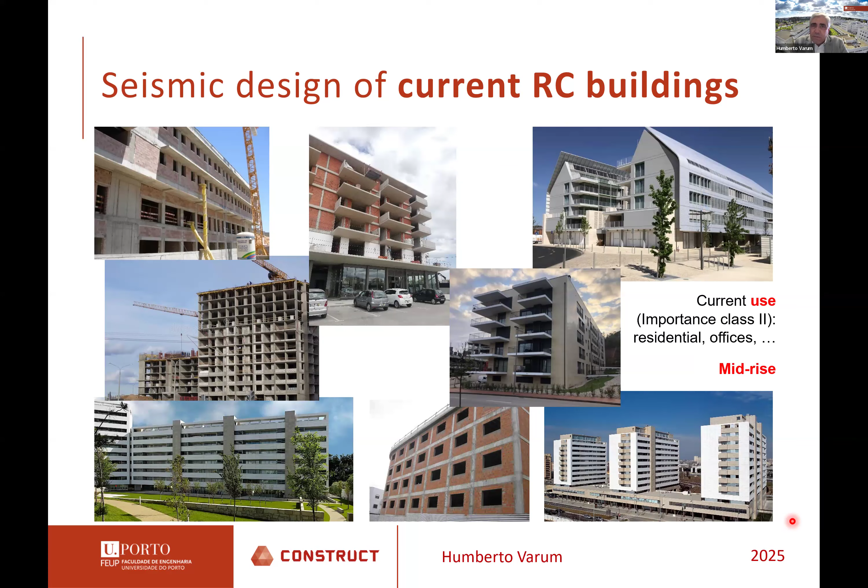It's important to highlight that during my presentation I will leave some comments, ideas, and eventually some provocations. It is essential to say that the message I would like to pass should be interpreted as applied to current buildings, buildings of current use, typically of importance class 2 according to our Eurocode 8, and also mid-rise buildings. The lessons and message I'd like to share are based and centered on this type of very common buildings.

In my lecture, apart from a brief introduction and some general comments to better frame my talk, I will give importance to three main pillars: the first is lessons learned from recent earthquakes; the second focuses on structural irregularities of buildings; and the third will discuss the importance and effect of infills on the seismic response and performance of our buildings. Depending on time, I will conclude with some final comments.

Allow me to share with you some questions that we put to ourselves in our research group, which are the basic motivation for the work we are doing in our research and technical activities.

The first provocation or question is: do you really know everything about the seismic response of these common building structures? The second question you should put to yourself every day is: do you really have regular building structures? Even if you recognize that our international and national codes have evolved a lot, are they adequate for the assessment and design of irregular building structures? And in another direction, are you really dealing well with the influence of infill masonry walls in the response and performance assessment of our buildings?

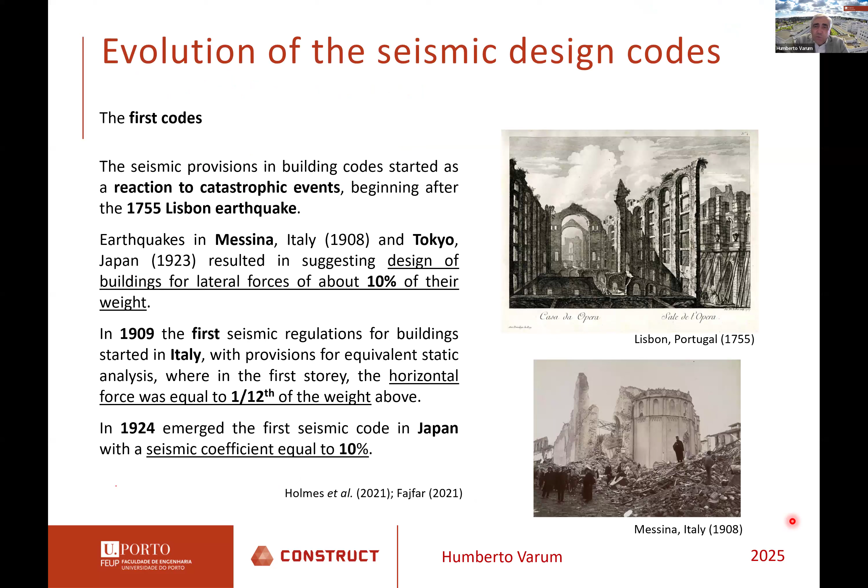Regarding the evolution of seismic design codes, we should recognize that seismic design codes are newborns. In fact, just in the first half of last century we started having some very simple documents, or at least concerns about seismic design. But it was in the second half of the last century, especially in the last decades, that we saw an important evolution of our codes worldwide. Also in this century, in the first two decades, we have seen a continuous and important evolution of our codes.

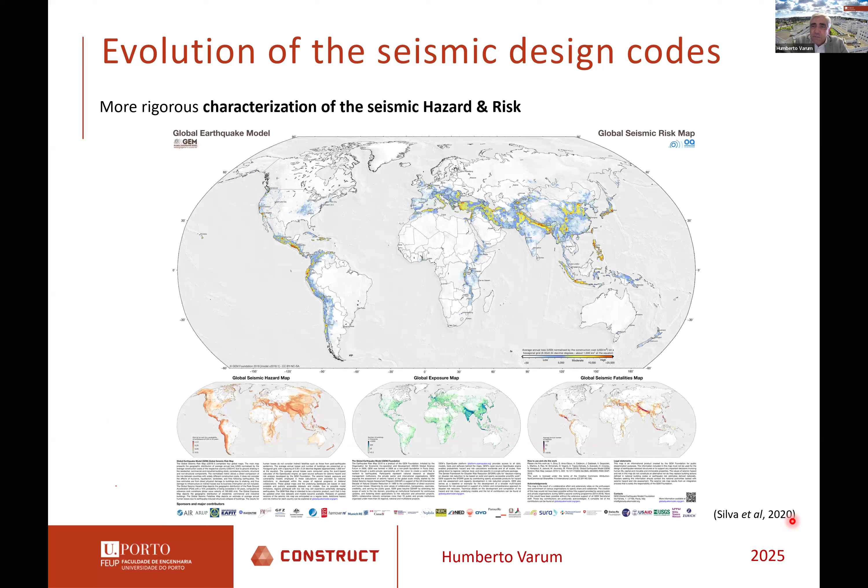In fact, we are seeing a continuous evolution of our seismic design codes all over the world due to different reasons. First, we have dense monitoring of seismic activity in the world, so with time we are knowing better and better the seismic demand.

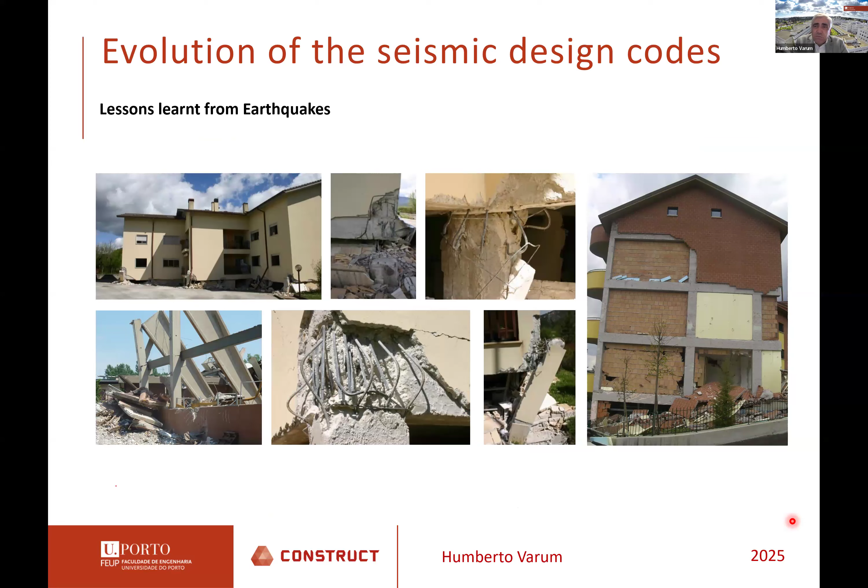In another direction, information spreads quickly and it is easy for the engineering community and the scientific community to have contact with the regions affected by earthquakes, so we are learning a lot from these earthquakes. And so those lessons end up also influencing the evolution of the codes.

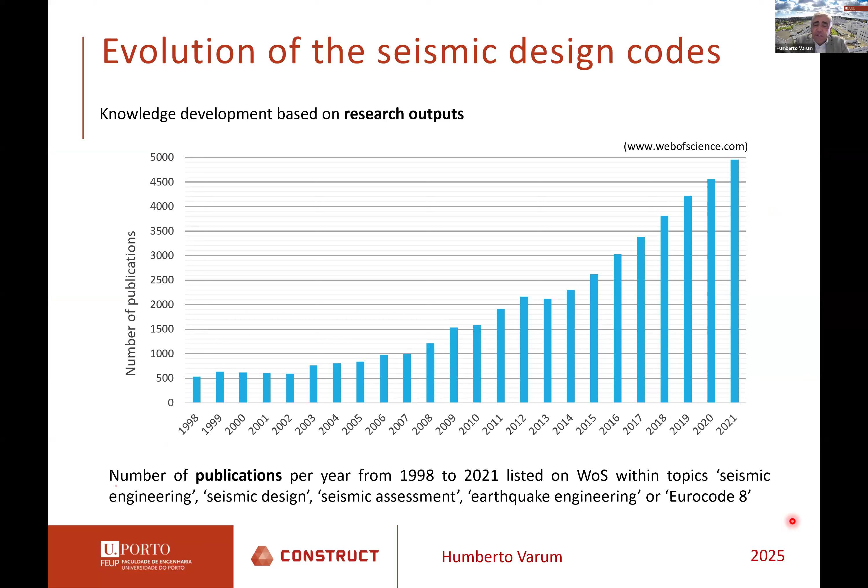In another direction, we have to recognize that all over the world our laboratories and universities are equipped with better conditions to study full-scale or large-scale structural components or even full structures. So all the investment in research creates output at the end - scientific output, papers, PhDs - but also much of this information creates knowledge that again gives us conditions to keep evolving our codes.

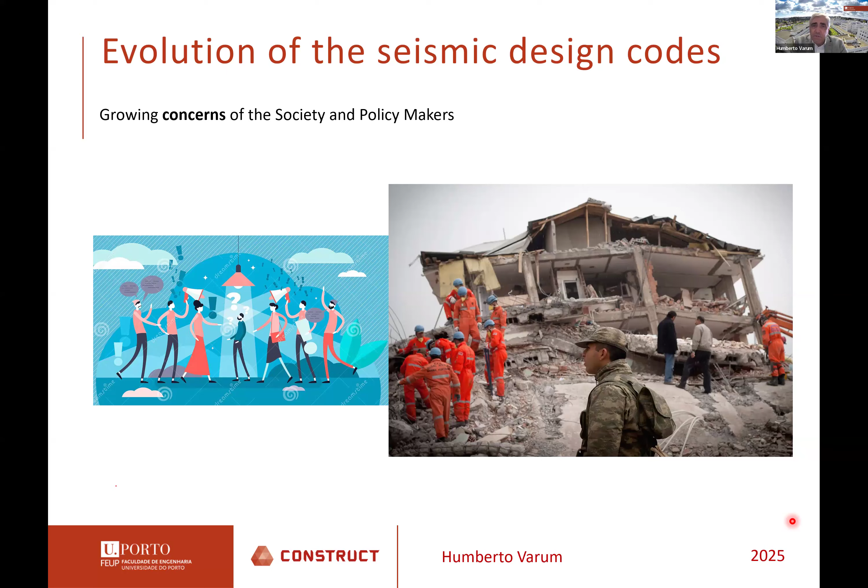And then, even recognizing that we do not live in a perfect world, there is a tendency of growing concern in our society and also among our policymakers regarding risks, in particular the seismic risk.

In fact, the dream of obtaining a set of standards to support the design of our structures started in the 70s and 80s. It was a long journey, but the first publication of the Eurocodes was concluded in 2007, and in 2008 a limited number of countries started adopting the Eurocodes.

Nowadays those Eurocodes have been adopted, and will keep being adopted, by an increasing number of countries. As is the case of Portugal, my country, which only adopted them in 2019, but we are now fully using all the Eurocodes that are published.

As you may be aware, we started a few years ago drafting a second generation of Eurocodes, and we hope that in the near future we'll have this second generation finally approved, in order to start the process of adoption by the countries using the Eurocodes.

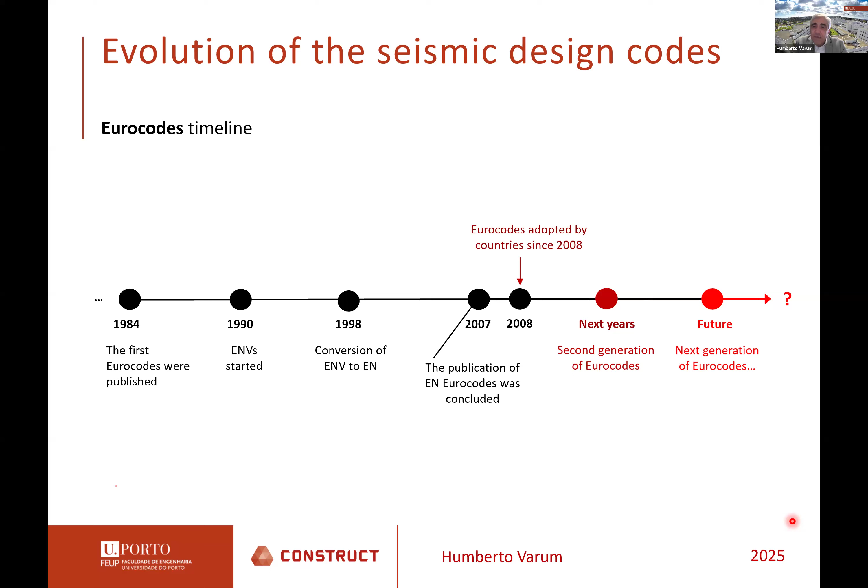And so we should continue our work, our mission, our research mission in universities and laboratories, in order to generate new knowledge that should be consolidated, simplified, and at the end of the line introduced into the next generation of Eurocodes.

From the lessons that you have learned from recent earthquakes and natural disasters, please allow me to share with you a couple of numbers and ideas.

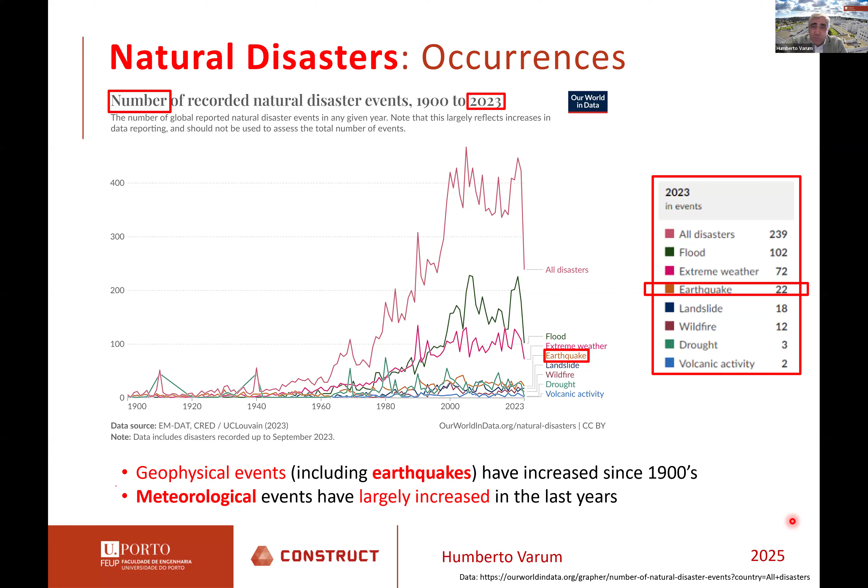According to global data regarding natural disasters with important impact on our built heritage and constructed areas, the number of disasters creating impact keeps increasing. If you share these natural disasters according to type of event, earthquakes, which belong to the group of geophysical events, are not the larger populated group. We have to recognize that meteorological events are, in terms of number, much more common.

It is important to highlight that even if earthquakes are not the more common type of natural disaster, when they occur they tend to affect larger areas, and eventually produce much larger economic impact, and are causing other effects such as mortalities and other types of impacts.

We are here among a group of experts in earthquake engineering, but please allow me to recall that the concept of risk, interpreted at the level of a single structure, a city, a region, or a country, should always be interpreted as influenced by three main vectors: hazard, vulnerability, and exposure.

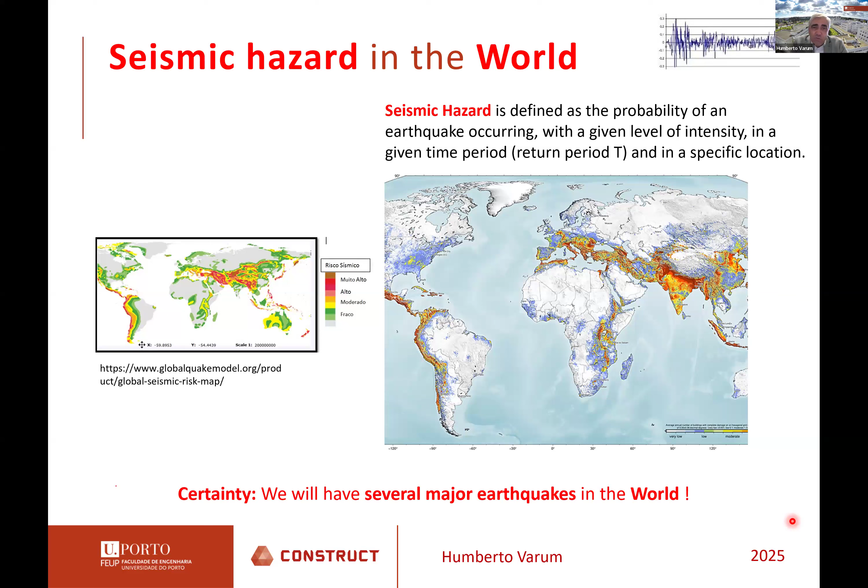Regarding the hazard, the seismic hazard we know better and better with time because we have a dense monitoring of the planet, and even though we don't know everything about it, we keep gaining knowledge and better characterizing the seismic hazard. But we do not have conditions, with the knowledge we have up to now, to predict when the next event will happen, where, when, and with which characteristics.

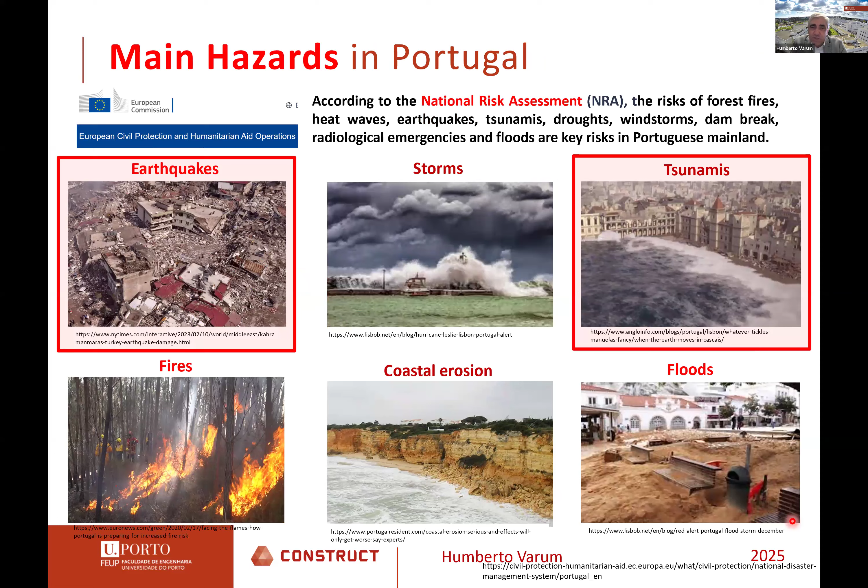For the case of Portugal, according to national and international reports, we recognize that among the main hazards that may affect our country are included earthquakes and the associated tsunamis.

Talking about seismic hazards in Portugal without making reference to the important event that happened on the 1st of November 1755 would be incomplete—it is recognized as one of the most destructive natural disasters that affected our continent. In fact, the history of Portugal changed on that tragic day.

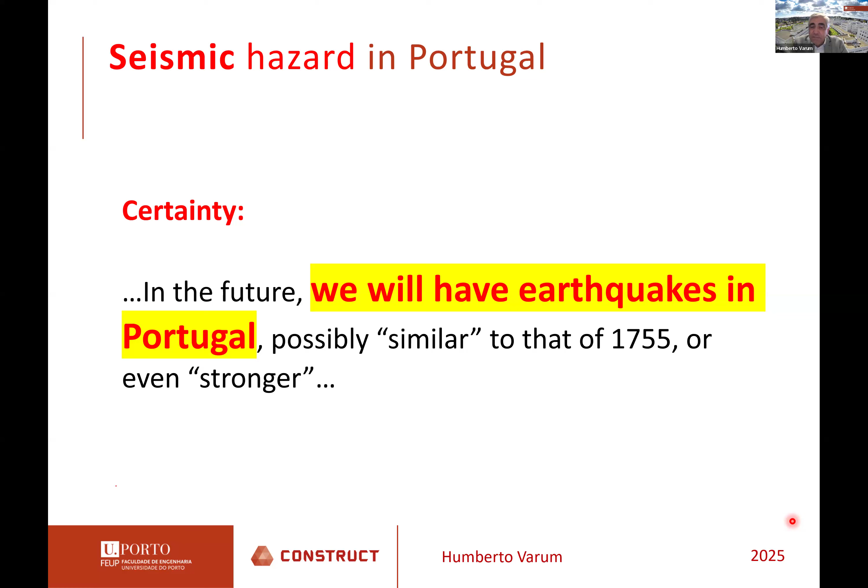Every time we witness an eventual earthquake anywhere in the world or in the country, the discussion restarts, and we are normally pushed to answer difficult questions—I mean we, as engineers and researchers working in seismic engineering. We have to recognize that we are not able to estimate or guess when the next earthquake will happen, but for sure in the future we will have one or more earthquakes of the same magnitude or even larger than the one experienced in the middle of the 18th century.

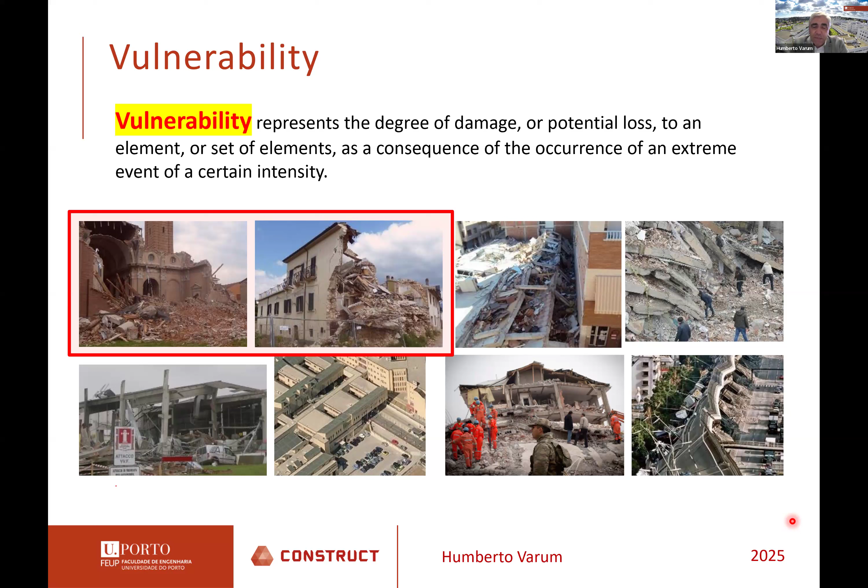The second vector of risk is the vulnerability, associated to the better or worse capacity that a building or structure has to respond to a certain level of demand. Finally, the exposure, where we try to include the value of our goods, the cultural value, the economical value, but also the number of users of our structure or buildings.

When talking about new structures, from the engineering point of view we can manage the risk considering all three main vectors. But when talking about existing buildings and consolidated cities, our capacity is limited. If you intend to reduce the risk for a certain building, structure, village, or region, we are limited essentially to managing this risk by improving—reducing—the vulnerability of our buildings.

So are you doing everything well in what regards the engineering approach, or should we keep and eventually increase our attention to the concerns related with seismic safety? Eventually the response is evident.

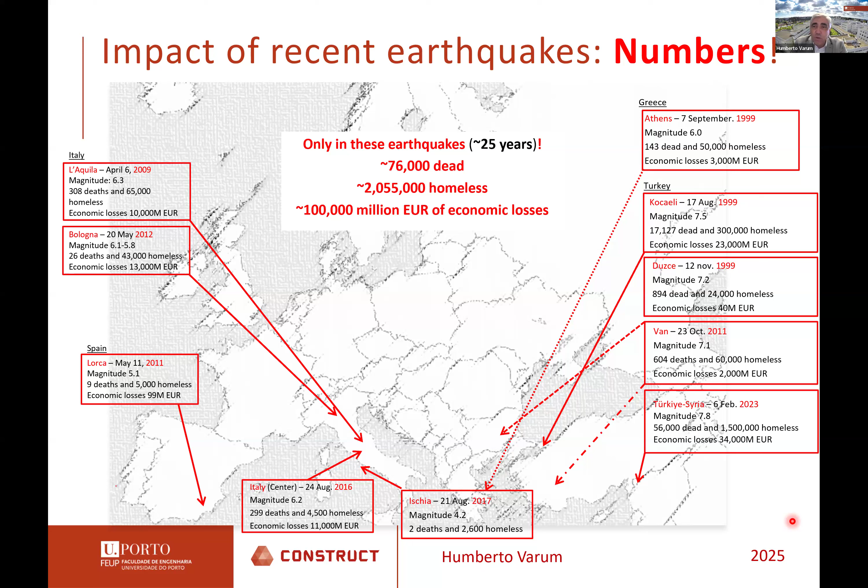In fact, we should, as society, keep the attention, keep the pressure in order to put more on the table the discussion on the seismic safety of our communities, of our cities, of our buildings, of our regions and countries, in order to somehow reduce the tendency of those numbers to keep increasing in the future.

Talking about reinforced concrete buildings and the common causes of damage and eventual collapse, I should say that all the lessons that you learn when you visit a region affected by earthquakes, all that you learn when you read a report from a site visit, tends to give us the common damage that are normally the same.

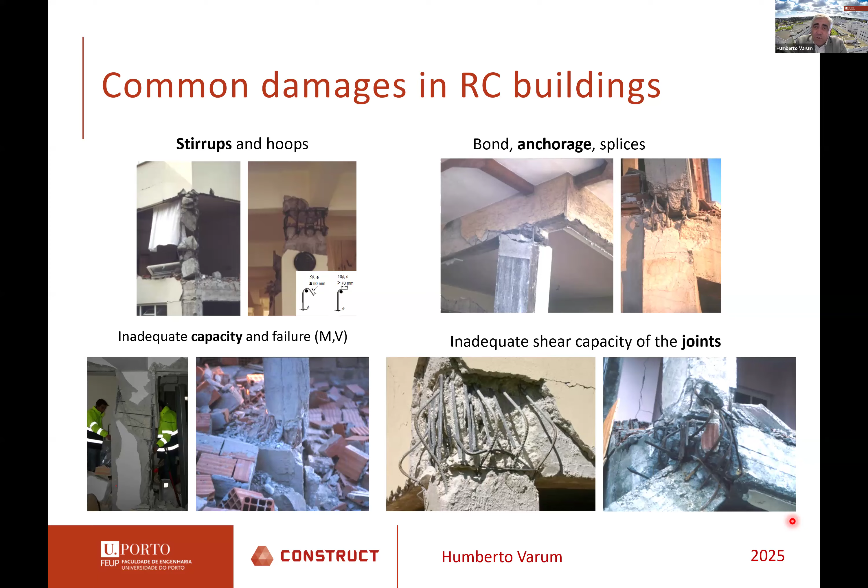The joints are a key point. We should say that it's not enough to design and detail properly our main elements, beam, columns, and walls, if you don't take the proper care on the connections. Otherwise, you'll not be able to explore the capacity of the main elements of our structure.

Of course, we do know that our structures, eventually our more flexible structures, may experience a poor behavior mechanism controlled by a strong beam weak column mechanism. This is very problematic, especially in older structures. The short column mechanism is also a very typical mechanism that you observe in many buildings.

Then the irregularities, both in plan and in elevation - we'll have time to discuss this in more detail. And then the interaction and pounding, when we are talking about building structures located in urban areas - the interaction among neighbor buildings could eventually, in some cases, protect the buildings, and in other cases, anticipate the damage and collapse.

But allow me, please, very simply, to highlight here two main ideas that are extracted from what we keep learning every time that you see regions affected by earthquakes.

Since an important part of the buildings that you have nowadays in our cities were already designed and built following the actual modern codes and eventually the better and more rigorous construction practice, we should say that our modern buildings tend to behave much better, as you expect. The main concern, or one of the major concerns regarding the seismic vulnerability of our buildings, is centered

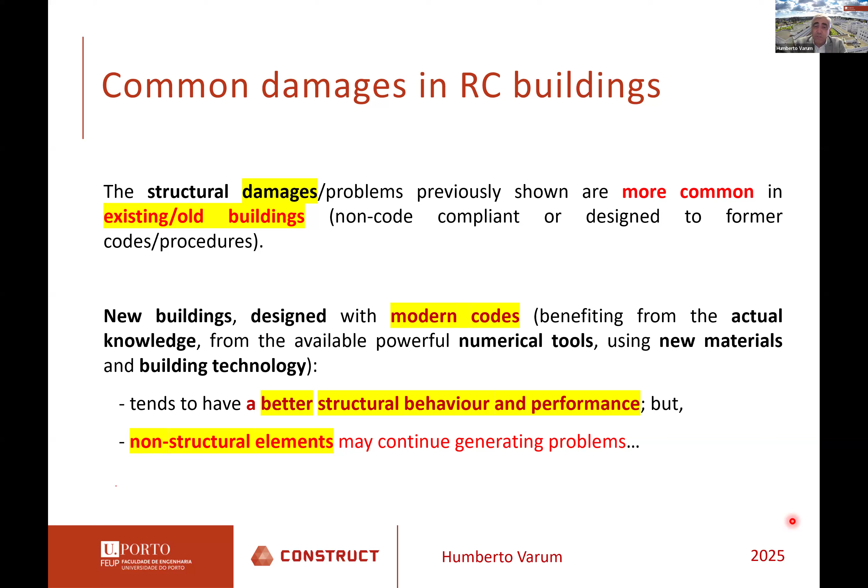We have also to say that from what we have learned and what we keep seeing every time that you visit a region affected by earthquakes, is that the non-structural elements, eventually such as the infills or facade elements, may conditionate the behavior and the response of our buildings. Eventually, they can introduce new fragilities in our buildings.

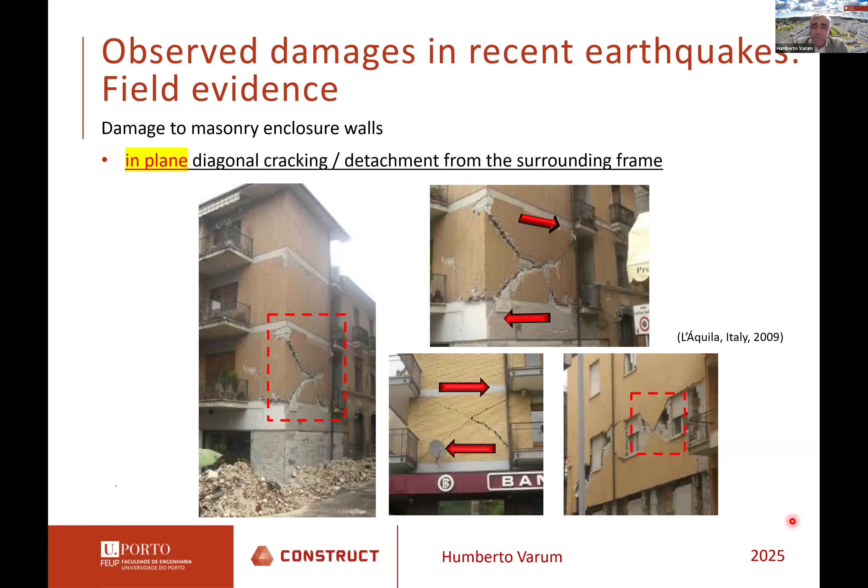This is something that you keep seeing, for example, in this case in Aquila, but among many other examples of regions affected by earthquakes, you see typically that, in fact, our masonry elements, both as interior elements, but also as facade elements, may be very strong, but those elements are fragile for loading, for when they are loaded in plane.

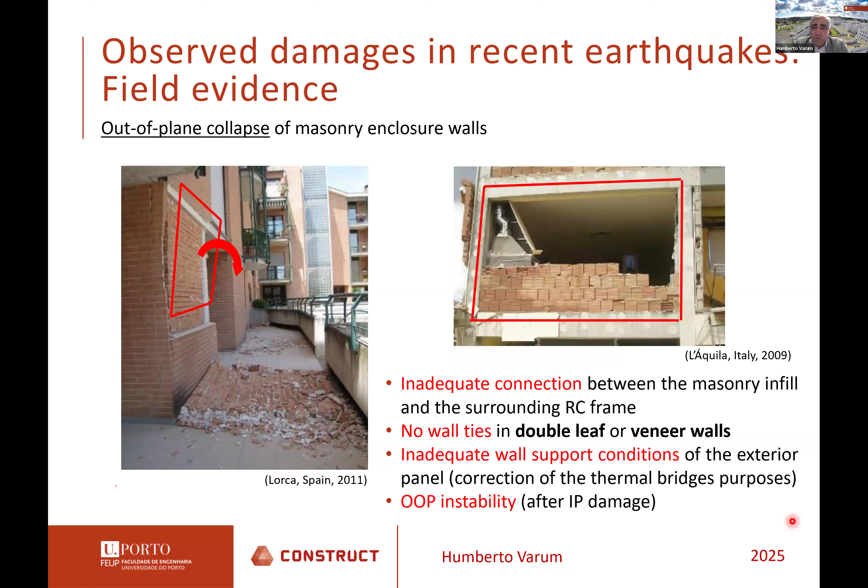But what has really been a big surprise, in particular in these recent earthquakes, for us, for me at least, is the number and the extension of collapses of the elements of the facade for actions out of plane, due to the well-known causes such as elements with improper connection to the structure, elements excessively slender, with poor support conditions, with no ties.

This is a picture that I normally like to comment on, because it corresponds to a scenario that you have seen in many places recently, but also here in this case in Aquila, in which we have seen current buildings with moderate to practically no damage in the structural system, but with extensive damage and collapse of the non-structural elements, particularly in the facade.

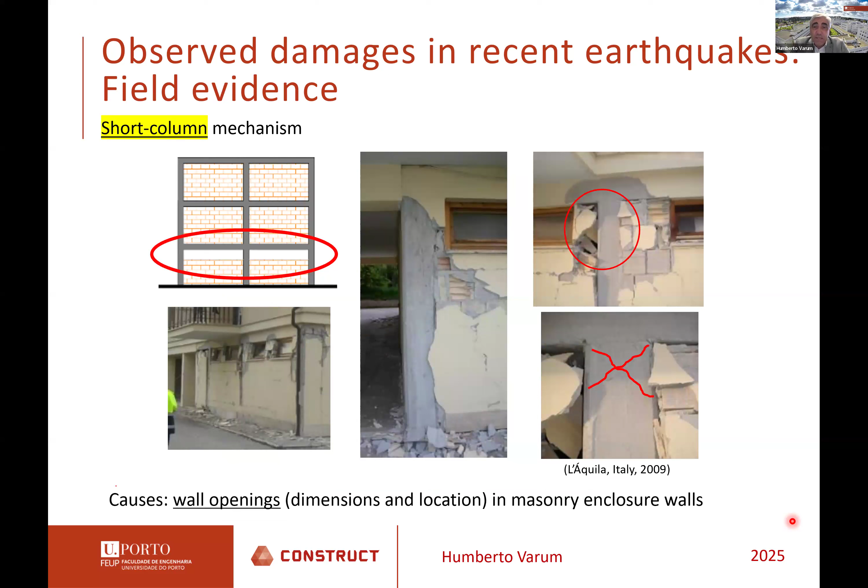This calls our attention to the fact that we should eventually in the future put more attention to studying these elements and their response under earthquake demands, and eventually their influence on the structural response.

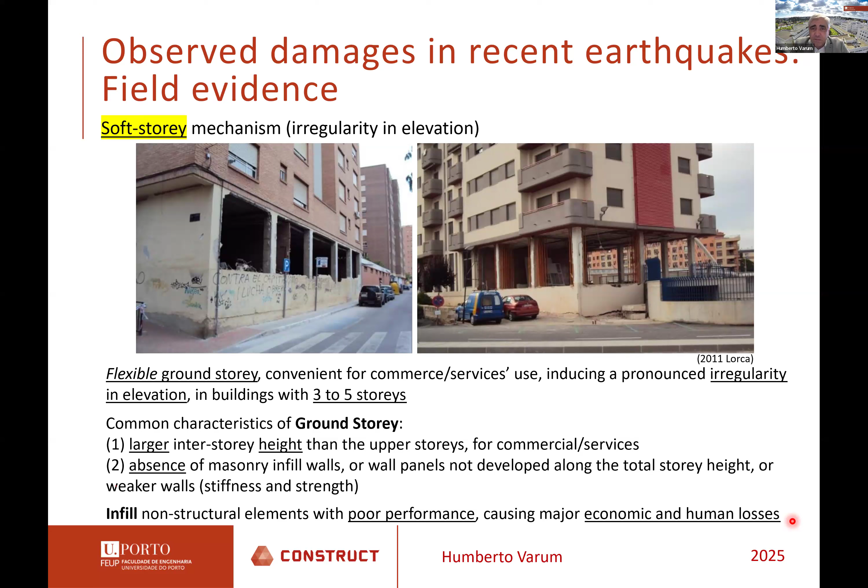The short column mechanism is well known and very common, caused by irregularities induced by a non-uniform distribution of infill masonry walls, both in plan and in elevation. In the case of Lorca, the earthquake that affected the south of Spain, you have seen many buildings with this poor seismic response.

We should highlight that even though we are using more detailed and rigorous models to simulate the behavior of our building structures, the more or less uniform distribution of non-structural elements may at the end affect the seismic response, dramatically changing the distribution of demands in terms of internal forces and deformations.

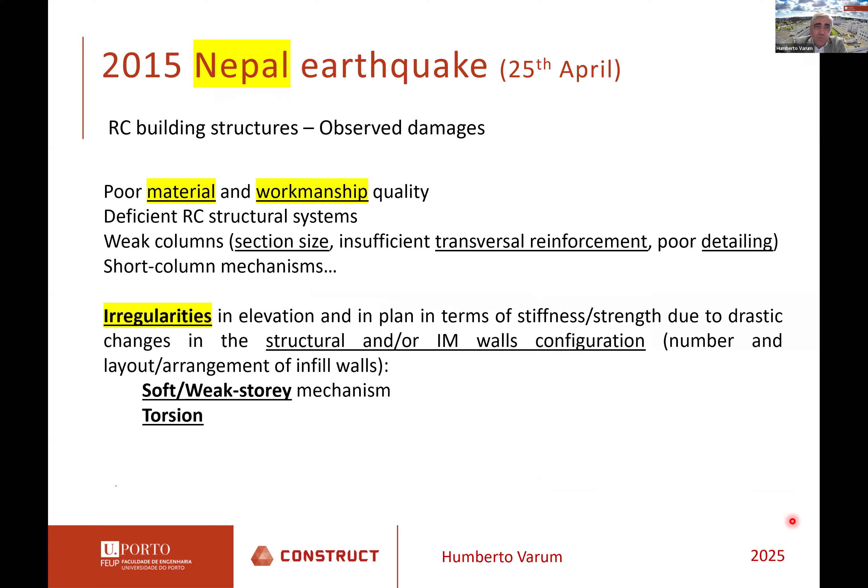Please allow me now to jump to Nepal. We had the chance to study the impact of this quite recent earthquake 10 years ago, and among the large number of buildings affected and collapsed, the reasons behind this poor behavior are well known: poor material, workmanship, and irregularities were present in many of the collapsed buildings.

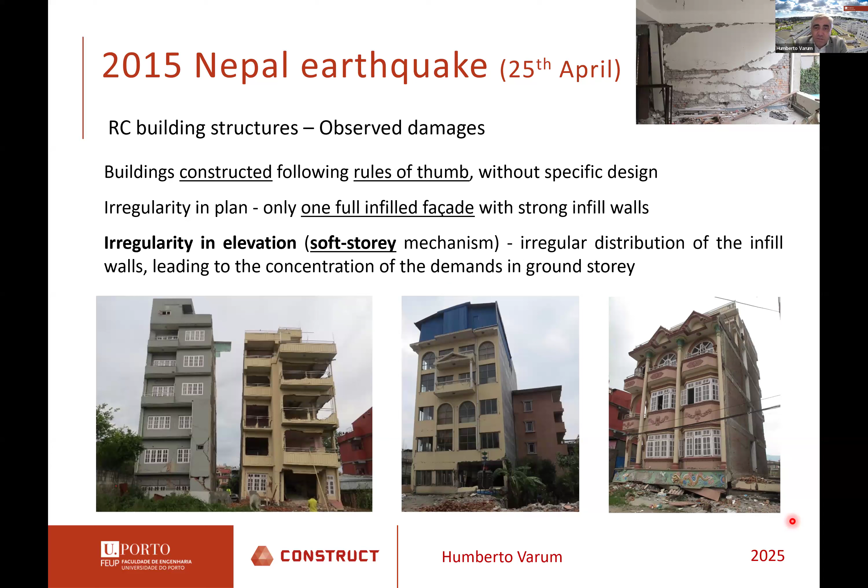Starting with the current buildings constructed without formal design, eventually following established rules of thumb but with some changes and adaptations, with increased number of stories and a non-regular distribution of infills in plan and elevation, this may condition the behavior and performance of those buildings, as was observed.

We also had the chance to visit some buildings formally designed following codes adopted in the region. For Nepal, the Indian code is largely used in design. Even when a building was properly designed, the structural system combined with the distribution of infill masonry walls ended up introducing a response controlled globally by torsion, with extensive damage that conditions the use of the building after the earthquake.

In 2017, we had the chance to study the impact of the earthquake that affected the central region of Mexico, analyzing buildings affected with collapses or extensive damage. The same reasons behind this poor behavior: material properties, detailing, and other well-known mechanisms.

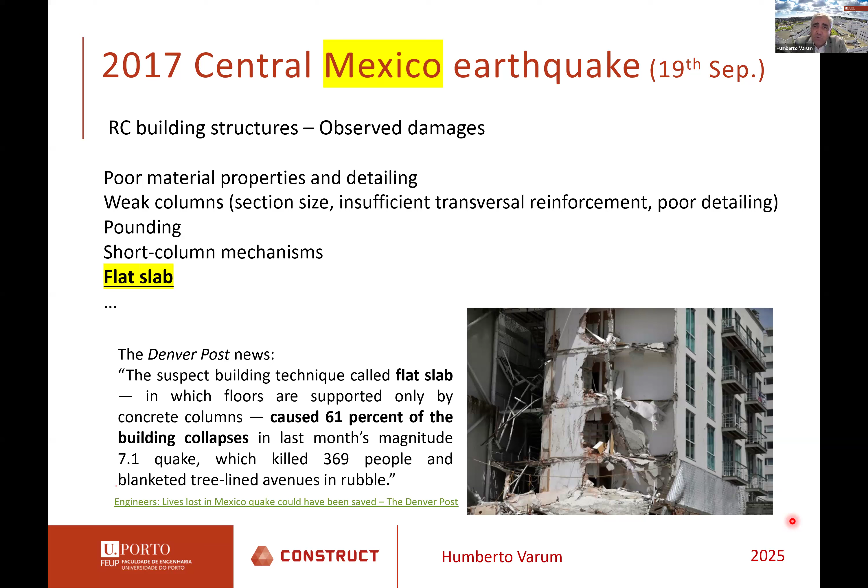An important number of the buildings that collapsed corresponded to flat slab systems. I don't want to say the problem is the flat slab itself, even though there are other issues affecting it, but we should give more attention to the design and detailing of buildings with this type of structural element.

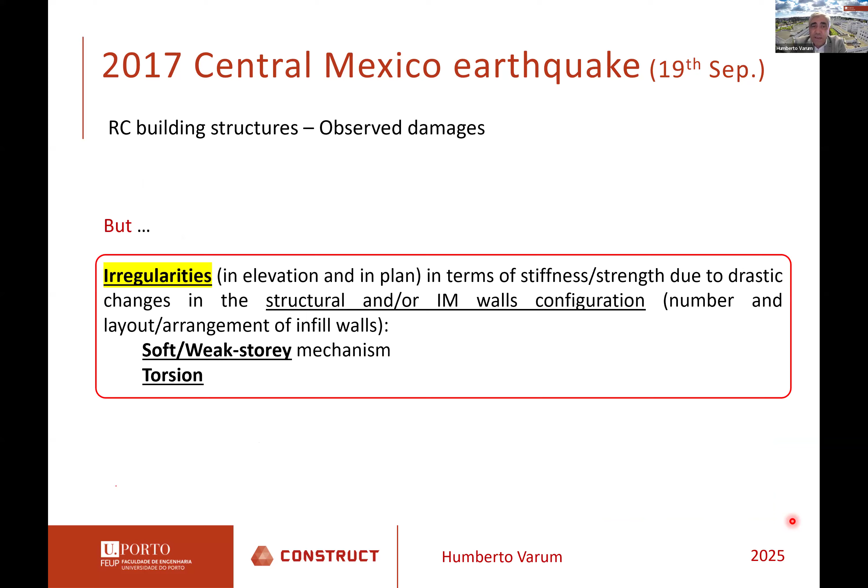Among the causes of the extensive damage observed in Mexico, irregularities were again one of the main problems. Particularly in corner buildings, even very current buildings where the structure was a regular system both in plan and elevation.

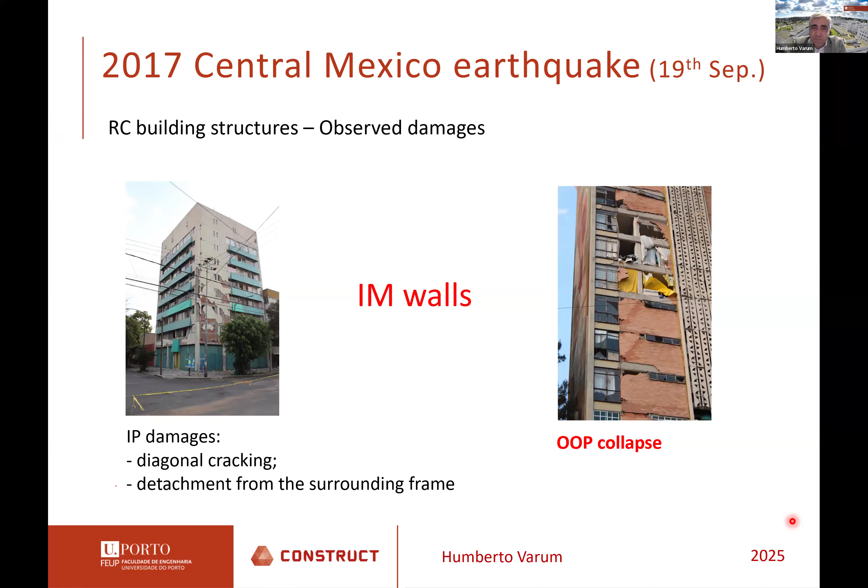Another aspect I would like to highlight is that all elements that are slender, irregular, and poorly connected, meaning non-structural elements not properly attached to the structure, end up performing poorly. This is the type of out-of-plane damage we have seen extensively in many buildings.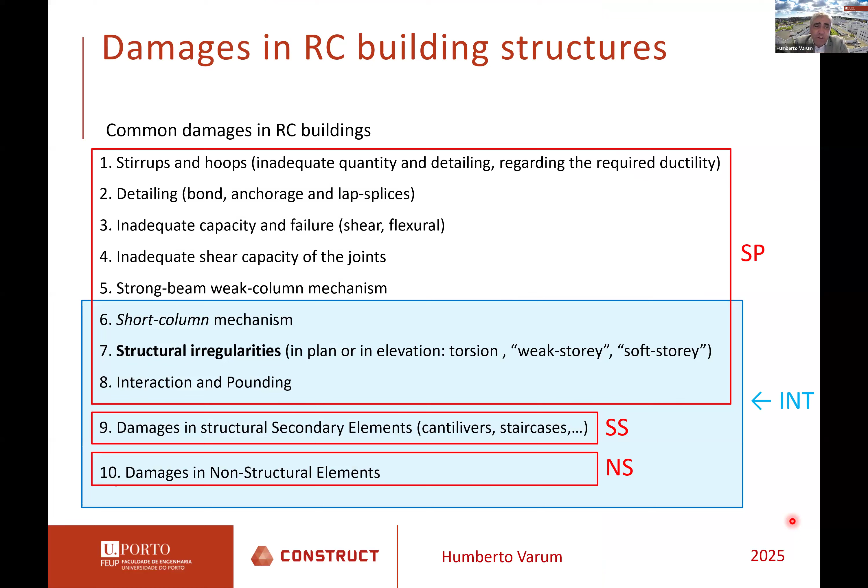From what I have said, I would like to point out that even though the typical causes of damage or poor behavior are well established and well known, in many situations the poor behavior of our buildings ends up being driven by the influence of infill masonry walls.

We should keep our attention, interest, and research in this line in order to better understand and characterize the seismic response of complex systems like buildings, considering the influence of infill masonry walls. The infill masonry walls may significantly affect the response of the building structure and its performance, but also the seismic response of the main structural system may end up changing the support and stability conditions of the non-structural elements.

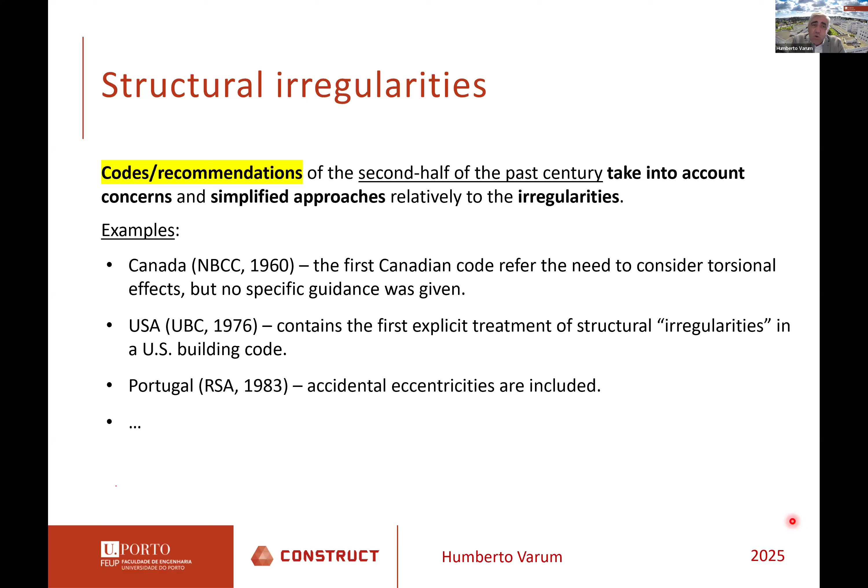Regarding irregularities in the structural system, this is a problem that was recognized early. In fact, the first codes, even if simple, all over the world included at least one recommendation or indication that the problem should be attended from the very beginning stage of the design procedure.

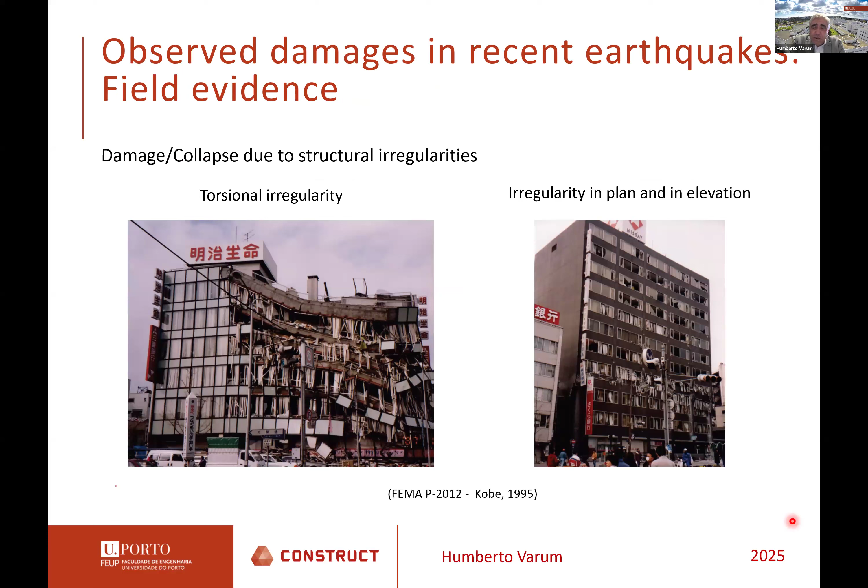But even though it is recognized from the first version of our codes, we keep seeing when analyzing earthquakes or regions affected by earthquakes, such as Kobe or Mexico, that it keeps being one of the main reasons for poor performance of our buildings.

In Mexico, already in the year 1985, a strong earthquake produced a large number of building collapses, and one of the main reasons for poor behavior of those buildings was associated with irregularities both in plan and in elevation.

Recently in 2017, again the same problem. So we do have concern about this problem, we do know the problem, but eventually the tools being used for design and detailing, and the type of pressures received in the conception, design, and detailing of our buildings, are not taking good care of this problem.

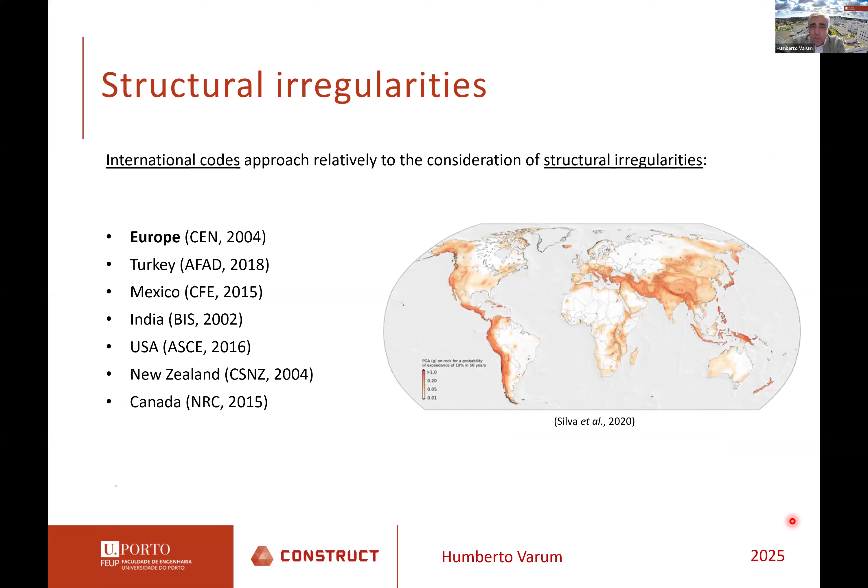We did in our research group a comparative analysis of some of the design codes for earthquake demands in different parts of the world, and so we compared the criteria that those codes impose in the evaluation of irregularities both in plan and in elevation.

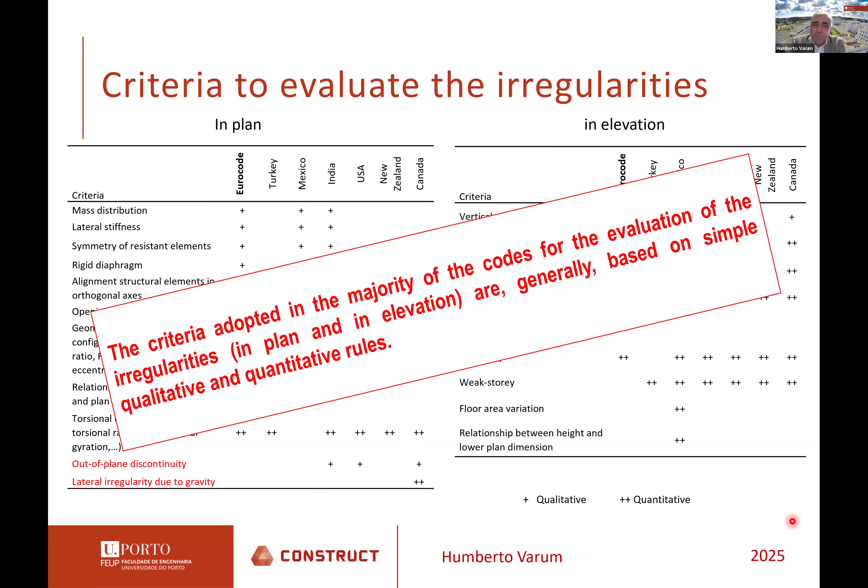Very briefly, I would like to highlight that in the majority of the codes, the criteria presented for the evaluation of irregularity are typically based on qualitative or very simple quantitative rules.

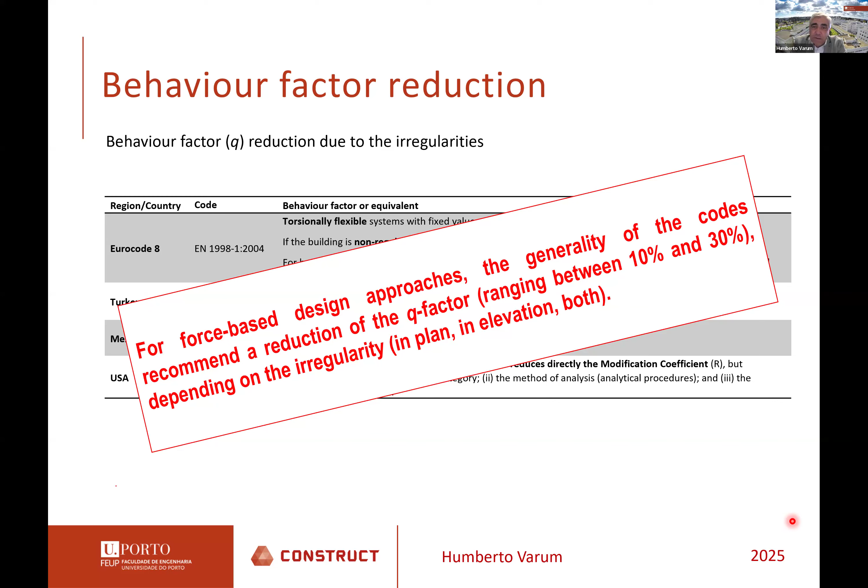For the codes we analyzed, when a structure is classified as irregular, the code itself restricts the models and methods allowed in design. For force-based design, the codes we studied generally reduce the behavior factor allowed, ranging between 10 and 30%, depending on the type of irregularity in plan, elevation, or both.

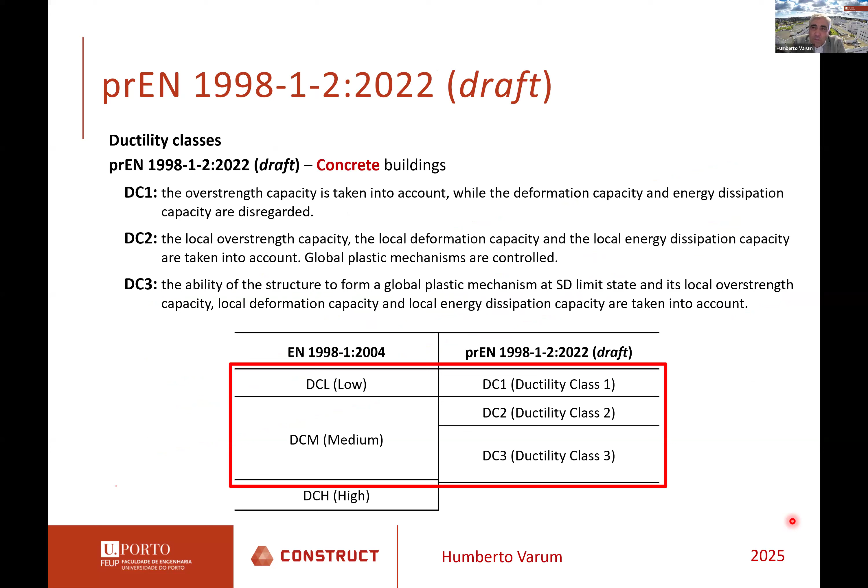As you know, in this recent revision of Eurocode 8, the ductility class was revised. For the case of concrete buildings, the ductility class high was eliminated, and an intermediate ductility class was introduced between the actual ductility class medium and low.

In this revision, concerns on torsionally flexible systems were kept, the concept of behavior factor was kept, but it was rewritten, making explicit the contribution to this behavior factor from the capacity of redistribution of the structure, the overstrength, and finally the deformation capacity and energy dissipation capacity.

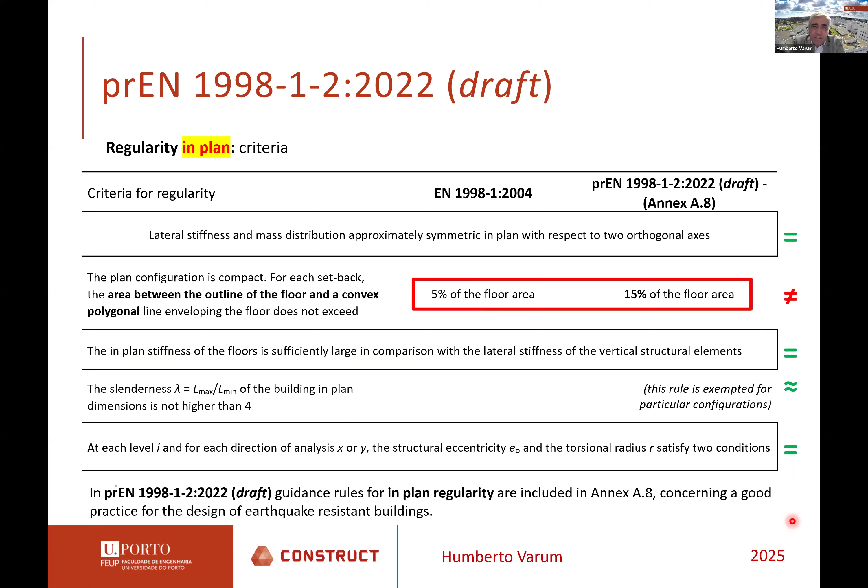Regarding the criteria for evaluation of regularity in plan, more generally the criteria were kept, but regarding the criteria for evaluation of regularity in elevation, some of the rules were adapted, passing from qualitative to simple quantitative rules in order to better quantify the level of irregularity.

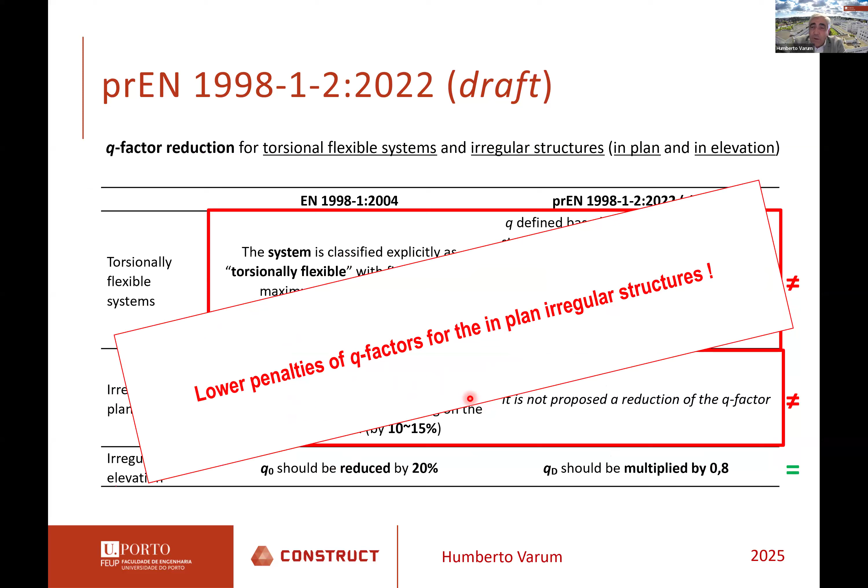Regarding those new rules, the penalties associated with the behavior factor were slightly reduced for the case of structures irregular in plan.

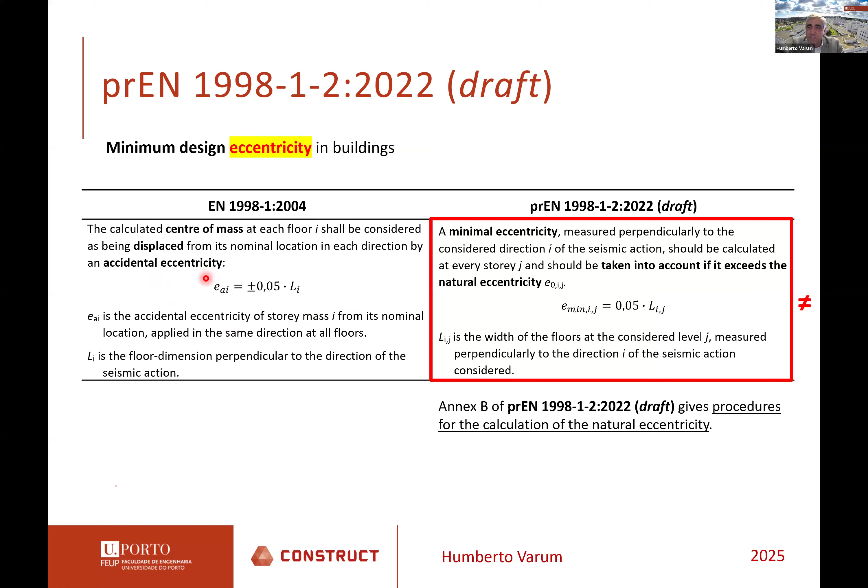The concept of accidental eccentricity is kept, but instead of being an additional eccentricity, in this new version it is considered as a minimum eccentricity.

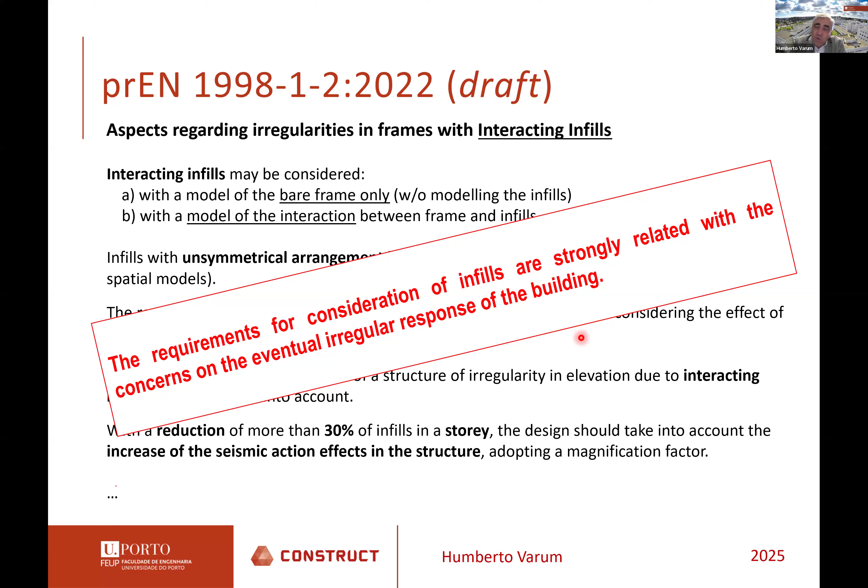In this new draft, which is in its final stage of discussion and preparation for final vote, the attention given to the effect of infill masonry walls in the response of buildings is intensified. New requirements are introduced for the consideration of infills, and those new requirements are strongly related to concerns about an eventual irregular response of buildings induced by those infill masonry walls.

I would like to share with you some case studies corresponding to buildings recently designed in Portugal, in different parts of the country. We selected for this study buildings without a very irregular shape, buildings with quite regular structural systems. Those 8 buildings were designed between 2018 and 2020, corresponding to buildings with 8 to 12 stories.

Only 2 of those buildings have constant story height along the building. The majority of them has pronounced important change in terms of story height in the first stories.

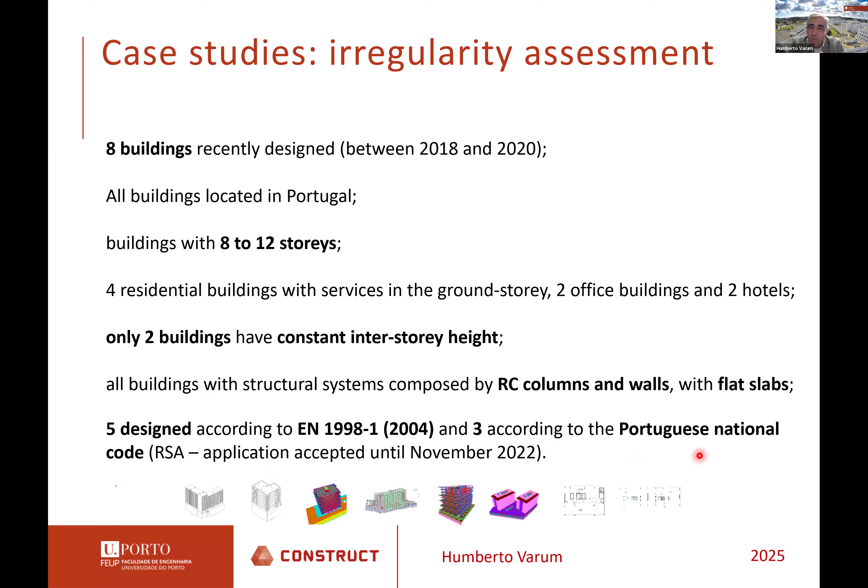All the buildings were designed and constructed with flat slabs and have vertical elements reinforced with concrete walls, with some columns. 5 of those 8 buildings were designed according to Eurocode 8, but 3 of them were designed according to our former national code. Classifying those building structural systems according to Eurocode 8, all of them were classified as wall systems with a relative ratio between frame and total lateral stiffness less than 6%. 7 out of the 8 structures were classified as torsionally flexible.

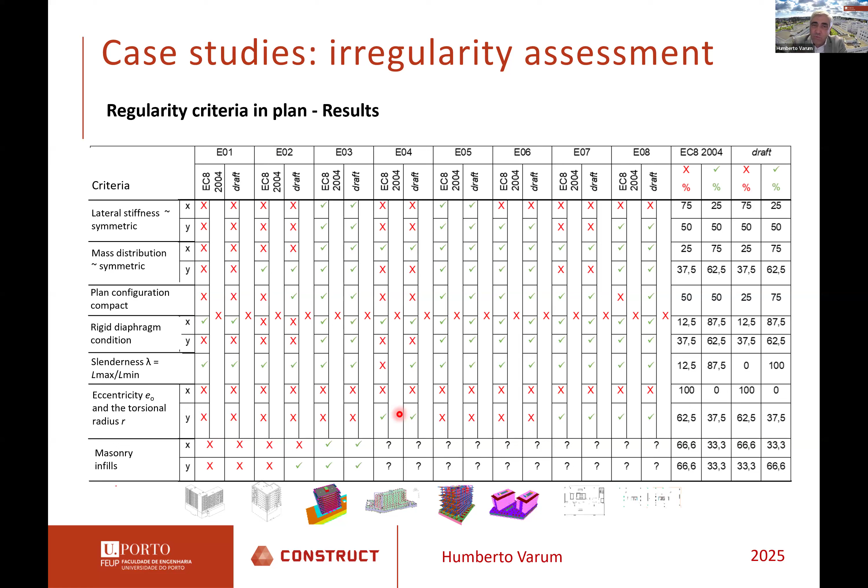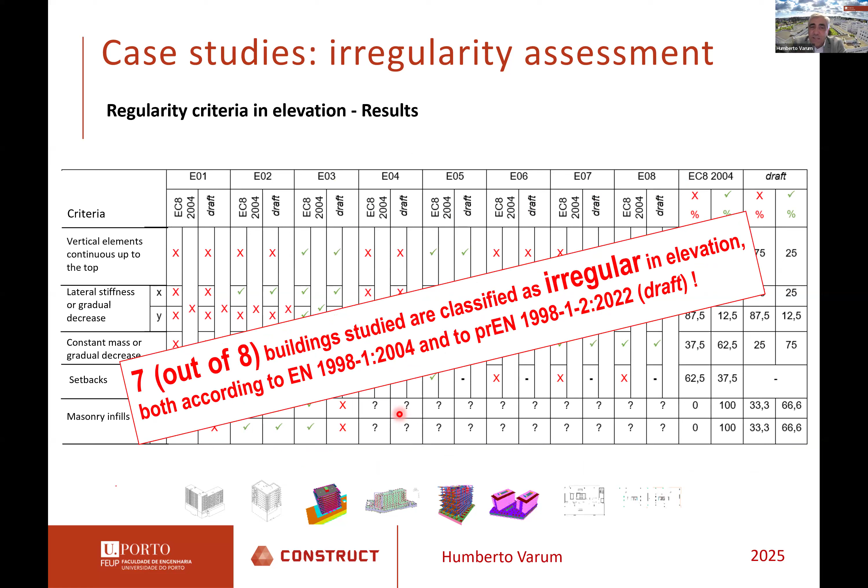Classifying those 8 buildings in terms of regularity in plan, following the current version of Eurocode 8 and the second generation, all of them were classified as irregular in plan for both directions, according to both documents. In what regards irregularity or regularity in elevation, 7 out of them were classified as irregular.

In fact, those 8 buildings, selected with some criteria to be more regular in terms of geometry, end up with the results that I just shared with you.

This allows us to put a couple of questions. First, are regular structures really common? Eventually not. Regular structures are very nicely presented in our textbooks, but in reality you will not find regular structures according to the concepts adopted in our code.

This allows us to put another question: should we really keep in future versions of the codes worldwide the classification of regularity as a binary classification, or should we eventually introduce at least one additional irregularity level? This is a comment that should motivate some research lines in the future.

Also, consider the importance that the regular or irregular response may have in the performance of our buildings. We should put to ourselves the following question: should we really keep this approach with the level of rigor that we are adopting in our codes, or should we eventually densify the criteria and introduce new criteria from a more rigorous point of view, that allows us to better classify this important parameter.

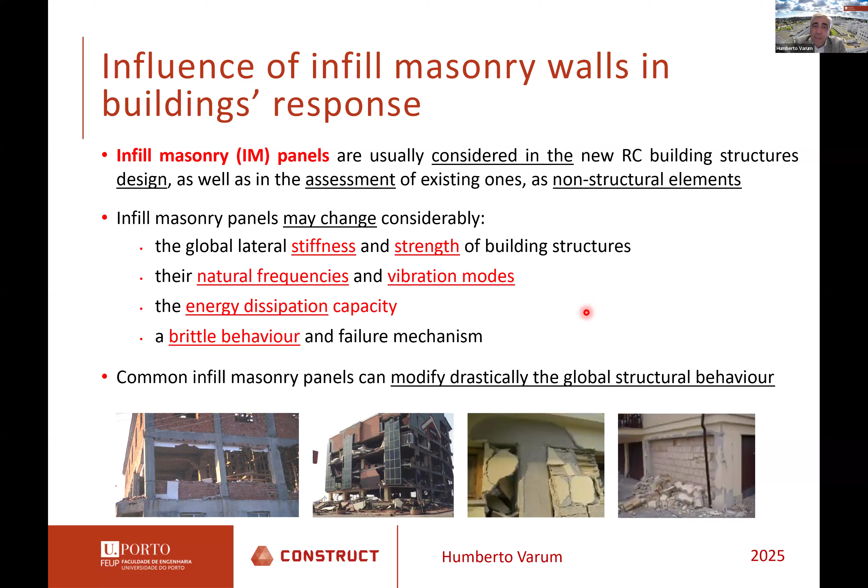In what regards the influence of infill on the response of our buildings, just to highlight what we already know: even with light infills, those infills may affect lateral stiffness and strength, may change natural frequencies and vibration modes of our buildings, may affect the energy dissipation capacity of our buildings, and not less important, may induce eventually a brittle behavior of part or the overall structure.

Allow me to comment briefly on the main outputs of one topic under a European project run a few years ago, called ICONS, developed in the ELSA laboratory of the JRC Center. Under this ICONS project, two similar planar frames were tested for lateral loads, tested with a pseudodynamic methodology. Those frames were designed and built following the current practice of the 70s and 80s in the Southern European region.

The building structure was designed only for vertical loads plus wind, and then it was assessed for earthquake demands with increasing magnitude of the ground motion, artificially generated and input to the structure using this pseudodynamic strategy. So the two similar structures, one was tested without infills and the other with infills, using this type of light ceramic clay brick with more than 60% voids, with the distribution you can see here in the image on the right.

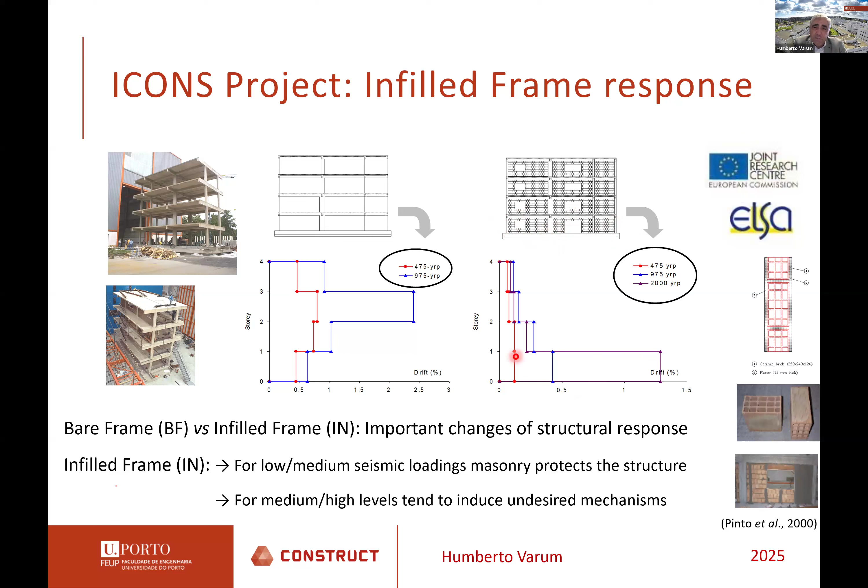For the structure with infills, in fact, that irregularity at the first story was completely hidden. The infill masonry wall somehow tends to protect the structure for the first levels of seismic demand, but when the infill masonry walls collapse in a fragile manner at the first story, it ends up creating or inducing a soft story at this level, with very limited interstory drift demands in the upper stories.

As numerical case studies, I would like to share with you 3 buildings that we have densely studied in Portugal, 2 of them located in the north of Portugal, here in Porto, and the third one located in Lisbon. Those buildings were designed and constructed in the 1950s.

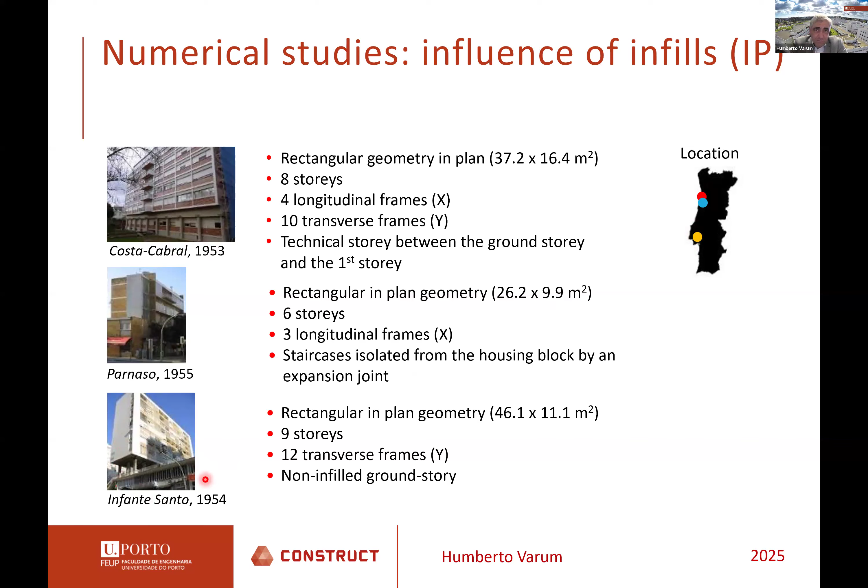Those two buildings located in Porto, which corresponds to a region with low seismicity, per coincidence have a more regular distribution of infills in height than this third case study located in Lisbon, with this pronounced irregularity in height due to the existence of a floor at the base without infills.

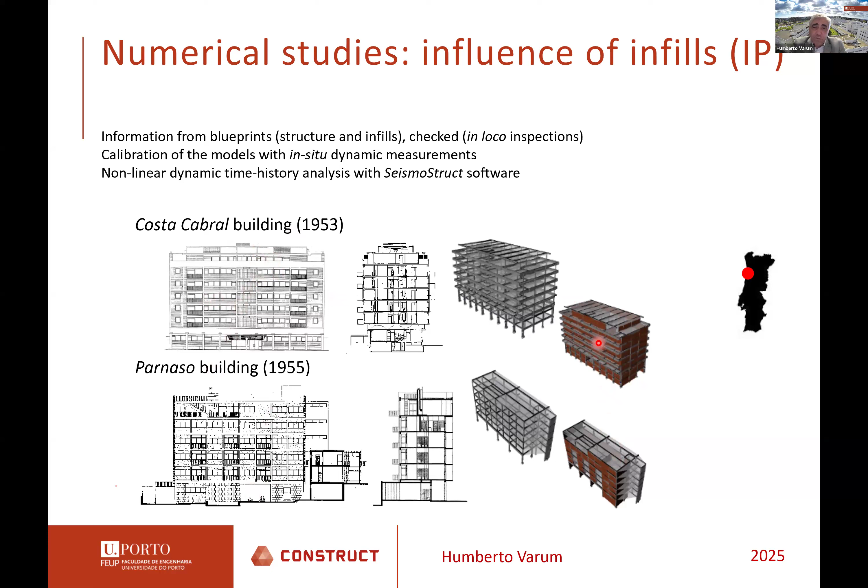So as strategy, those buildings were studied with analysis of the blueprints available, with all the details confronted with reality in the buildings. Then we have measured natural frequencies and modes, and finally we had calibrated our models of the buildings with infills. With the models calibrated, we have been playing, activating and deactivating the infills, analyzing their influence in the response.

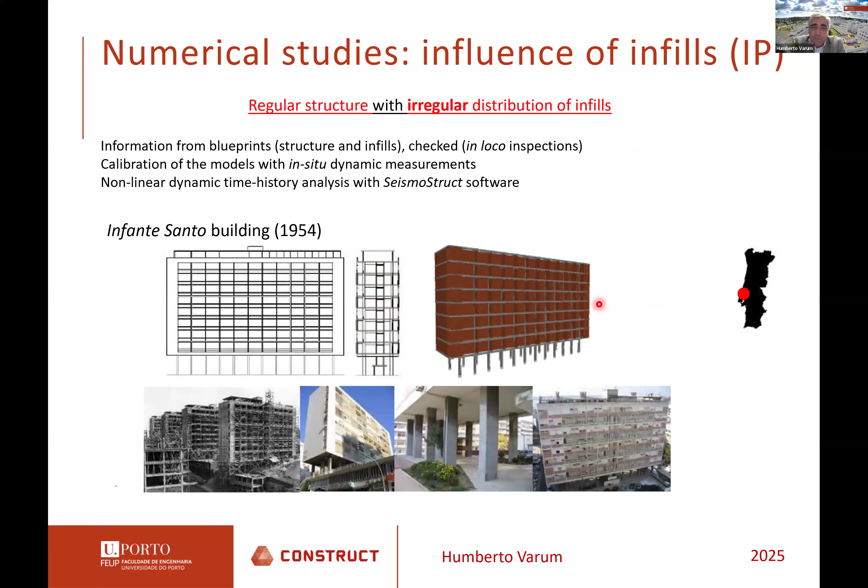For the third case study, this building even eventually doesn't need a single calculation. It is very predictable how this type of structure tends to behave. But for this case, comparing the response of that structure with a very irregular distribution of infills, particularly in height, comparing the response of the structure without infills and with infills, the deformation demand in the upper stories is practically zero, very, very low. While the larger concentration of demands for the structure with infills tends to be concentrated in the lower stories.

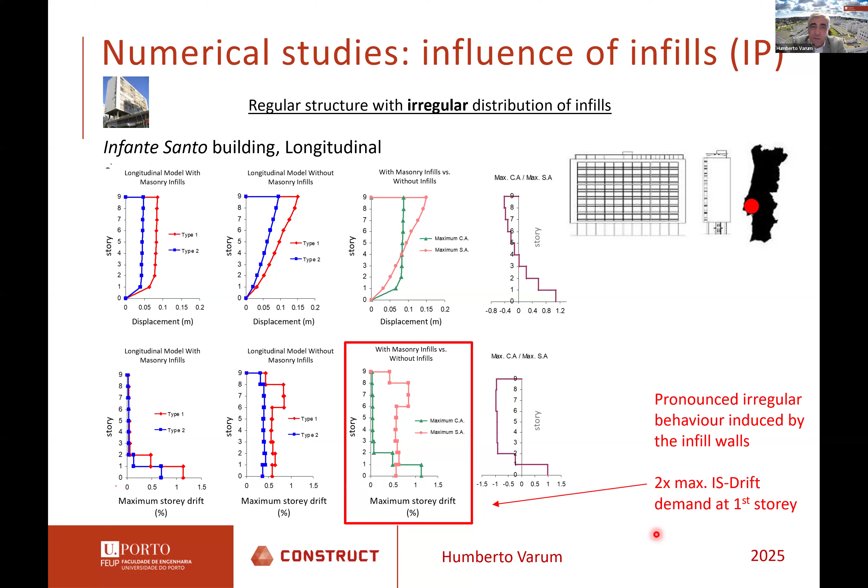And when you compare the same structure for the same input in terms of earthquake demand, activating the infills may eventually protect a large part of the structure in the upper stories, but will tend to develop much larger deformations in the ground story when compared with the structure analyzed without infills. And we're talking about a difference of eventually two times for a specific type of earthquake demand.

But talking about local deformation in terms of ductility demand in the column base, eventually for this case study, we have determined and estimated a difference of three times. So the infills, for specific structures like this case, tend to produce a much larger demand in terms of interstory drift and ductility demand in some specific regions.

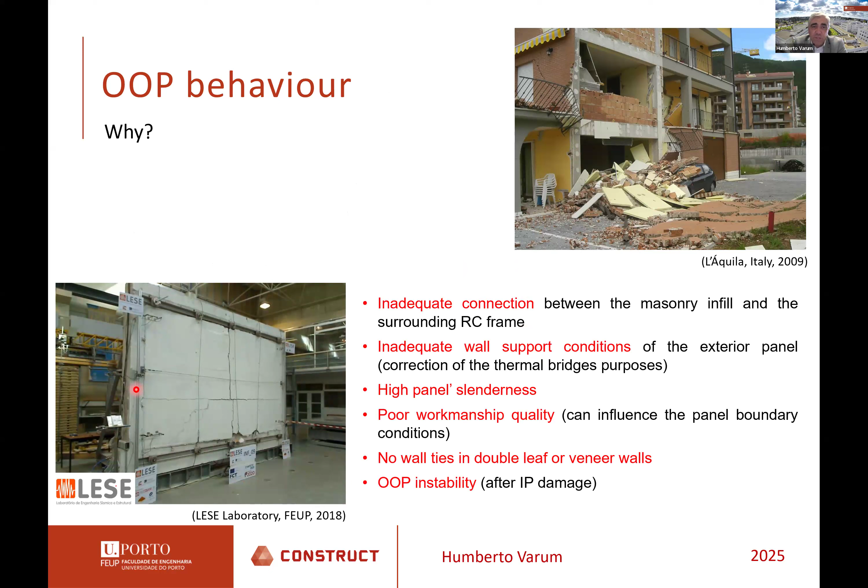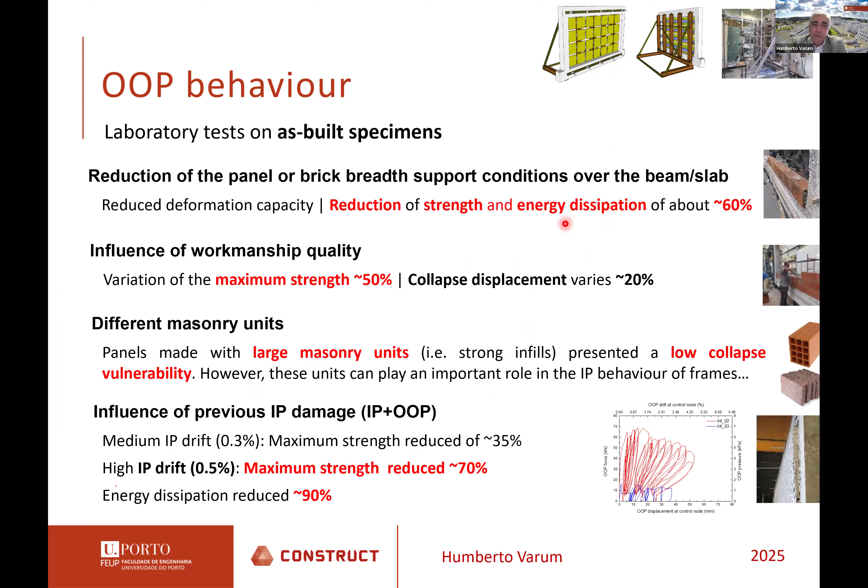Here in the Faculty of Engineering of the University of Porto, we have kept attention to this problem of out-of-plane behavior, and so we have installed in our labs a platform to test full-scale infill masonry panels. We have up to now developed a series of tests studying the influence of different parameters such as type of bricks, type of masonry, quality of workmanship, type of support, type of connection, and so on.

We have also studied the influence of an eventual minor in-plane damage on the out-of-plane behavior and capacity of those infill masonry walls. We also studied and validated different techniques to improve the seismic performance of those infill masonry walls out of plane.

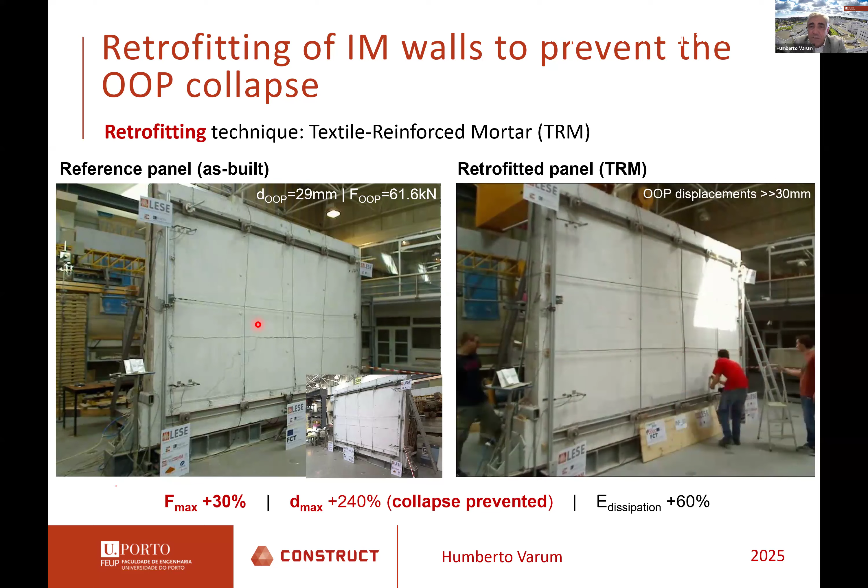And basically, what we have confirmed in the tests that we have done up to now is that with simple and economic solutions, introducing, for example, a net within the plaster, we may increase the out-of-plane capacity of our walls. Energy dissipation capacity can also be largely improved, but not less important, eventually it can prevent collapse and therefore prevent the potential casualties that may result from the collapse of those facade infill masonry walls.

So, for the case of Portugal, but also in other regions of Europe, we should recognize that a large part of our building stock corresponds to buildings made of reinforced concrete structural systems. In those buildings lives an important part of our population. Most of those buildings were constructed without concerns regarding energy comfort or thermal requirements that we have in our current regulations.

And so we now have a tremendous, a very good opportunity to address this recognized energy poverty in an important part of our society, especially in particular the older generation that are using older buildings, typically older houses.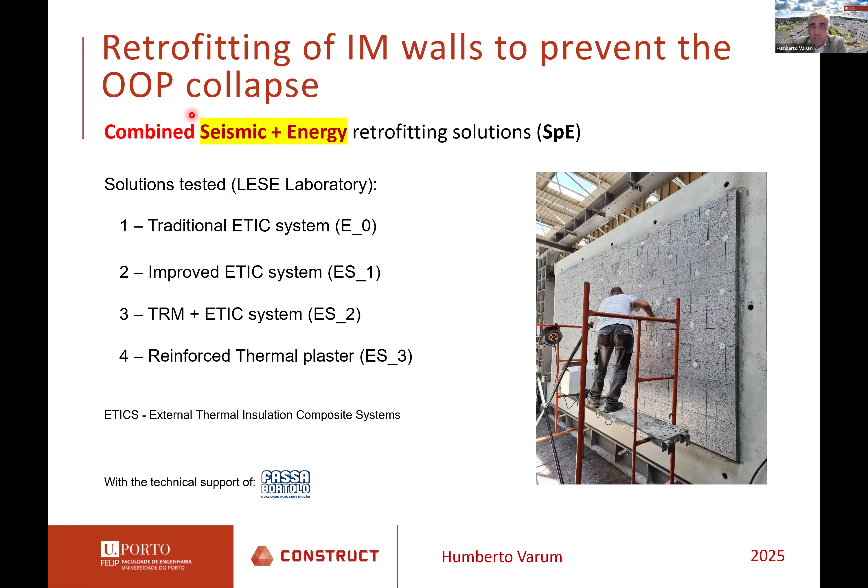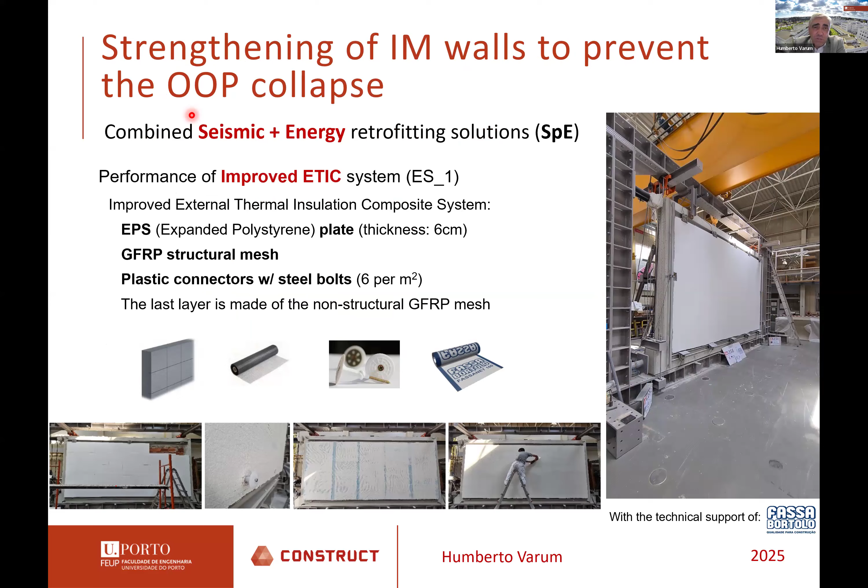Eventually, we should take this opportunity to improve the conditions of those houses, trying to explore solutions that combine the energy retrofitting of those buildings with the seismic retrofitting of those structures, particularly those elements in the facade. We have also been studying the common solutions applied in energy retrofitting, and we've proved that with a very minor investment, eventually changing the type of net used in those solutions, we may improve in an important manner the lateral deformation capacity in terms of out-of-plane behavior and response of those systems.

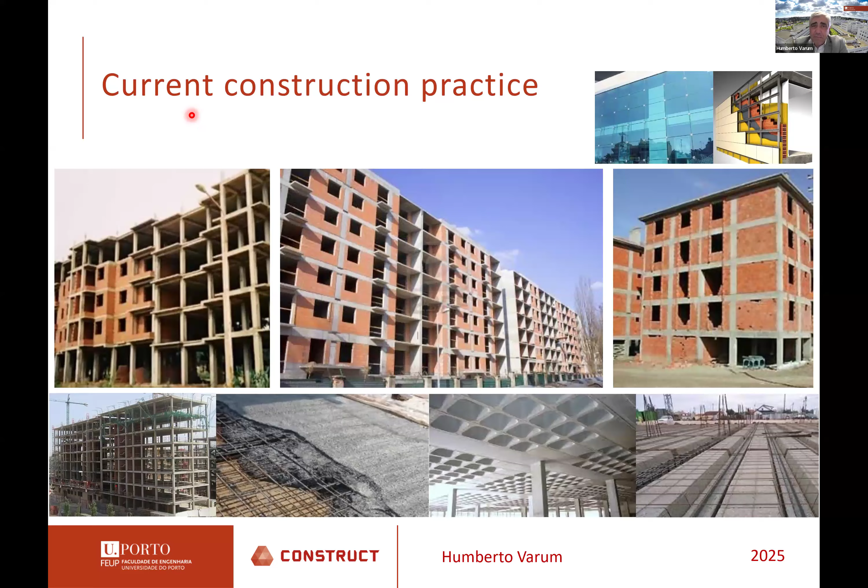To conclude, if you analyze the structural systems adopted in our current buildings, when we started using reinforced concrete we mainly adopted frame solutions, but with increasing demand in our codes, we're now essentially building wall systems. This evolution started a couple of decades ago with the adoption of flat slabs, and nowadays most of our structures are built with flat slabs.

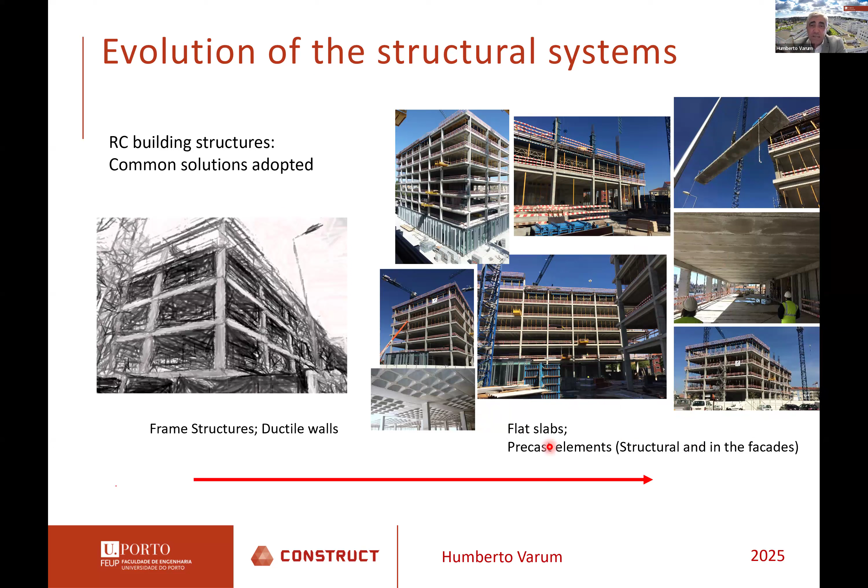Due to different reasons, our construction sector is pressed to introduce more precast elements in construction. This evolution was somehow slow. But regarding the solutions adopted for non-structural elements, the evolution was continuous. Due to the pressure of more exigent thermal demands, as well as acoustic and other demands, we have been continuously changing the solutions adopted in the construction of our buildings.

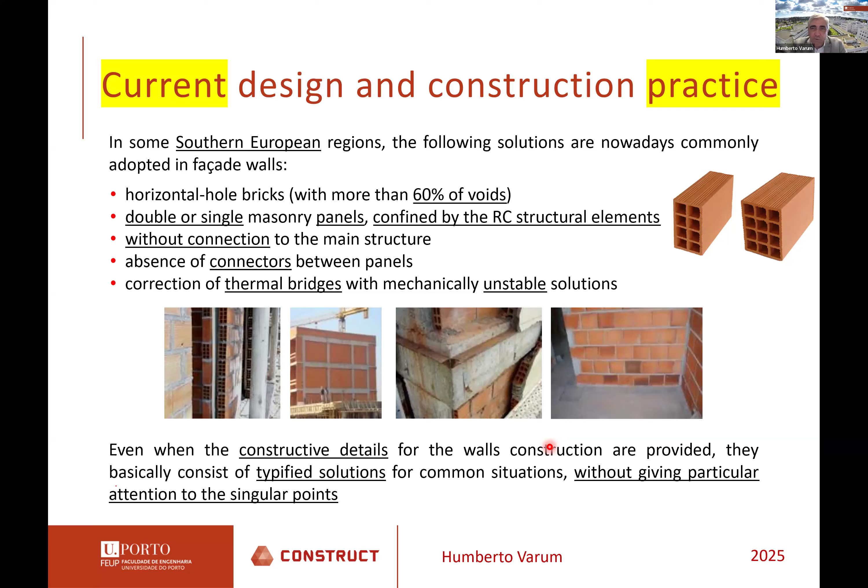In what regards construction practice, I would like to highlight that we understand a certain inconsistency between the detail put into the structural system and that put into non-structural elements. In fact, in many situations we receive at construction sites architectural drawings without technical details that recommend and guide the options taken for installation of these non-structural elements, something that should be discussed and improved in the future.

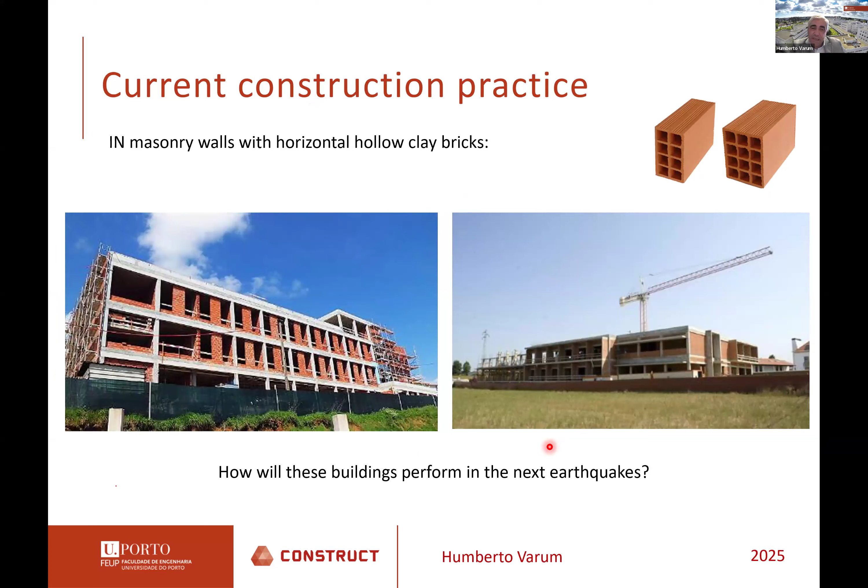We should recognize that all the decisions taken from conception through the design phase, detailing, and construction will always, at the end of the line, determine the better or worse seismic behavior and performance our buildings will have in future earthquakes.

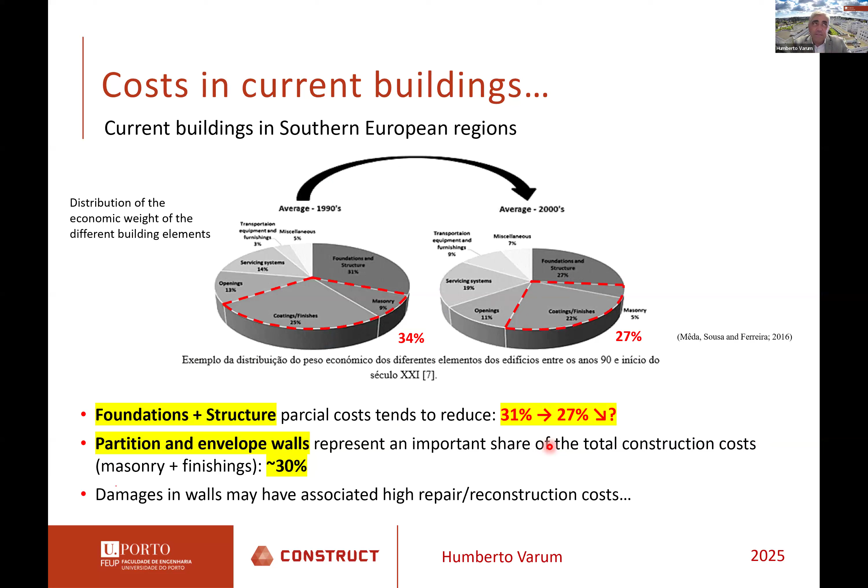Regarding costs, a simple comment: we recognize that for our common buildings, the partial cost of foundations plus structural system, compared with the total investment in construction, represents less than one third of the total cost, at least for the case of Portugal. The tendency is for this fraction to be reduced, because our buildings are becoming more complex systems, with more and more layers of infrastructure pressing the partial cost of structure plus foundation down. So briefly, it does not compensate to try to save money on our structural system.

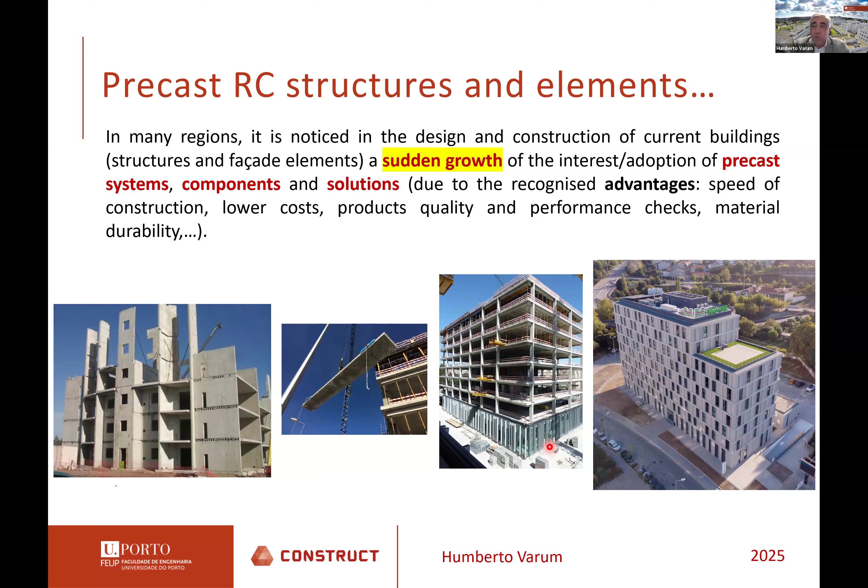I said before that at least in Portugal, but also in other parts of southern Europe, there is enormous pressure to reintroduce precast elements or fully precast structures in construction design and practice. So here is a concern: we do need this strategy to attend to the large demand for buildings needed in society for the housing problem we are experiencing now. But we should not leave the industry alone. We should put our knowledge, expertise, laboratories and universities in support of this industry, to develop solutions that attend to these requirements without introducing new vulnerabilities.

One technique gaining more attention in society is 3D printing for construction of eventually small buildings. Again, we should not leave our colleagues from architecture, construction and building alone. We should put our expertise in support of the development, detailing, and construction of these new solutions.

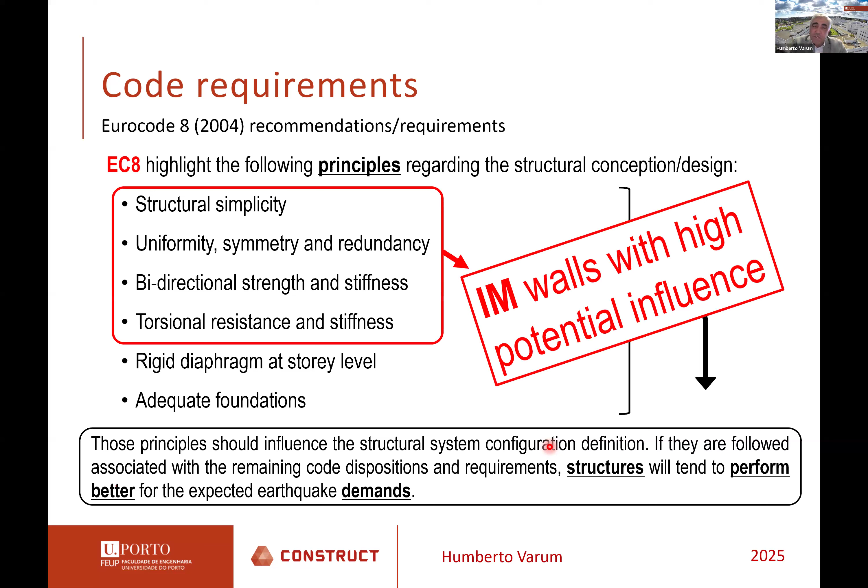As final remarks, we should recognize that all international codes include, in their first pages, simple principles and recommendations that should be followed from the engineering point of view to promote better seismic performance. But then we have the infill masonry walls, which in many situations may somehow condition this behavior.

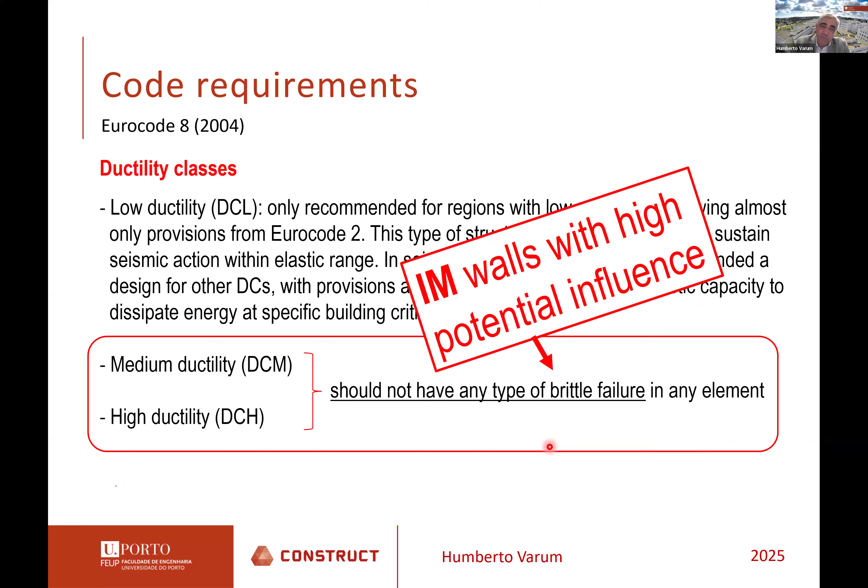International codes, as in the case of Eurocode 8, allow us in design to explore high levels of ductility. But the infill masonry walls may somehow limit the exploitation of ductility in parts of our structure, or eventually the entire structure. So our codes tend to have a dense list of rules, recommendations, and verifications for structural elements, but for infill masonry walls, the level of development is not the same.

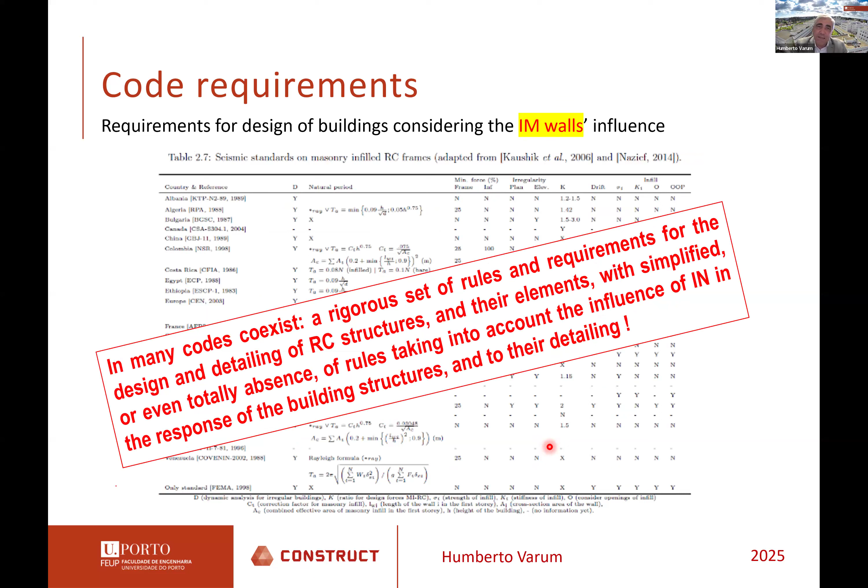So there is also here a kind of inconsistency that should be addressed in the future, densifying our codes with procedures or strategies that may help the designer promote structures that are less vulnerable, not just in terms of the structural system, but also considering the influence that infill masonry walls may have.

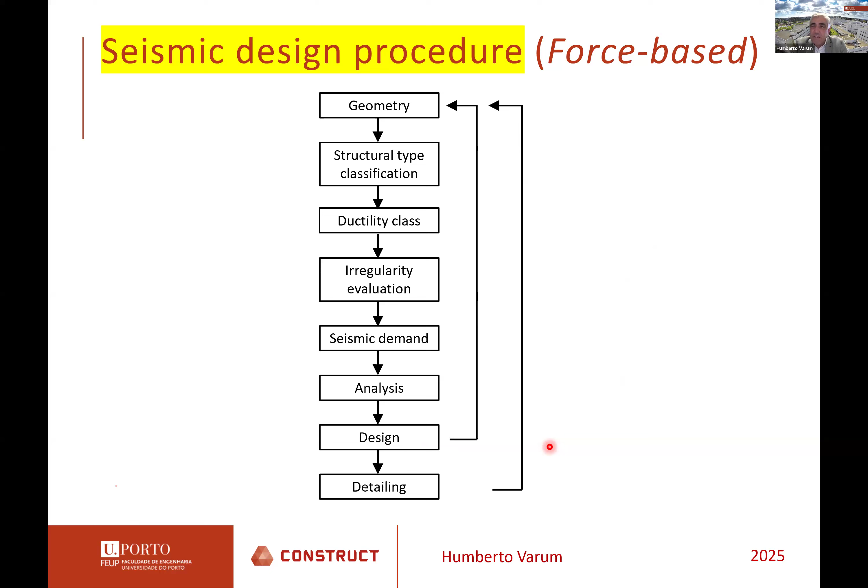We should recognize that the seismic design of any structure, including buildings, is a complex iterative procedure. From the design perspective, we should account for a large list of requirements, details, and verifications. But there are two aspects I would like to highlight in this lesson: irregularities and infills. The influence that infills may have on the response and performance of our buildings should never be disregarded, whether designing a new structure or assessing an existing one.

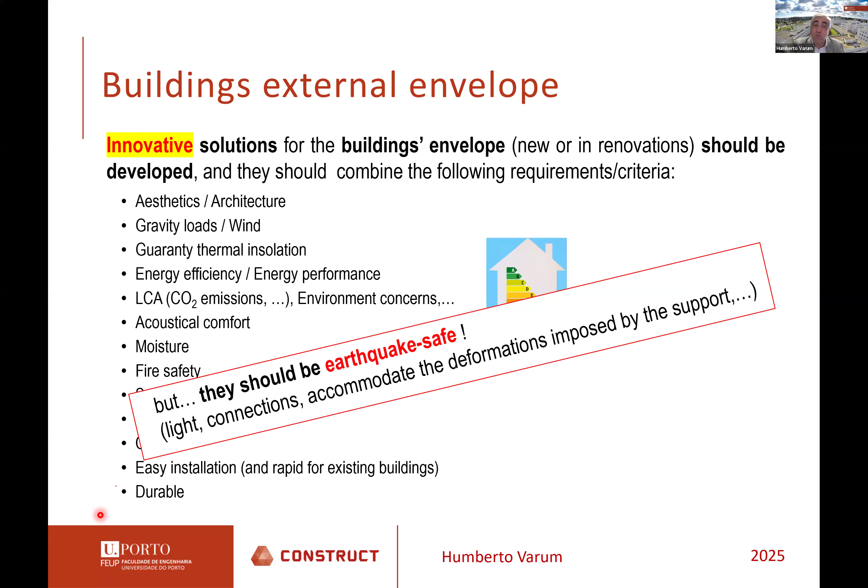We should recognize that our society is increasing the level of demands in terms of performance, from different perspectives, of each construction element and product, but also in the space being constructed or adapted in existing buildings. This long list of requirements is very important to recognize. We should be more demanding in the future regarding thermal insulation, energy performance, acoustic comfort, fire safety, and so on. But the solutions we conceive, design, detail, and install in our buildings should attend to that long list of requirements, but should never compromise adequate safety.